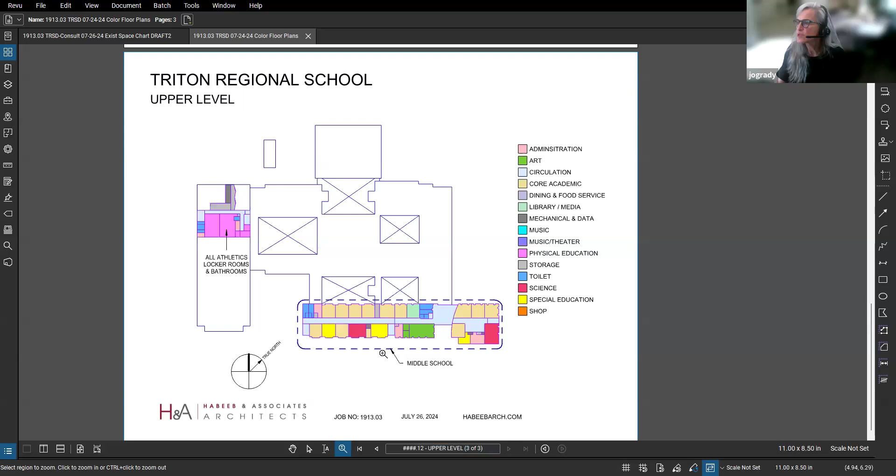There it is, okay, we are all seeing it now. So this is the colored floor plan, which is the upper level, and it's color coded for the uses. We have a ground floor, a main floor, and the upper level. It shows the middle school area dashed, and the shared area with a heavier dashed line, which would be the auditorium and the cafeteria. Correct? Yes, yep.

So a core academic space is typically a classroom, where instruction takes place. We have science classrooms, the media center which is the library, gymnasiums, cafeteria as mentioned, and art, music. We did see some rooms that were shop rooms—not sure we got that quite right, but I think there are some shops. There's the auditorium, and at the bottom we've identified the spaces being used for special education.

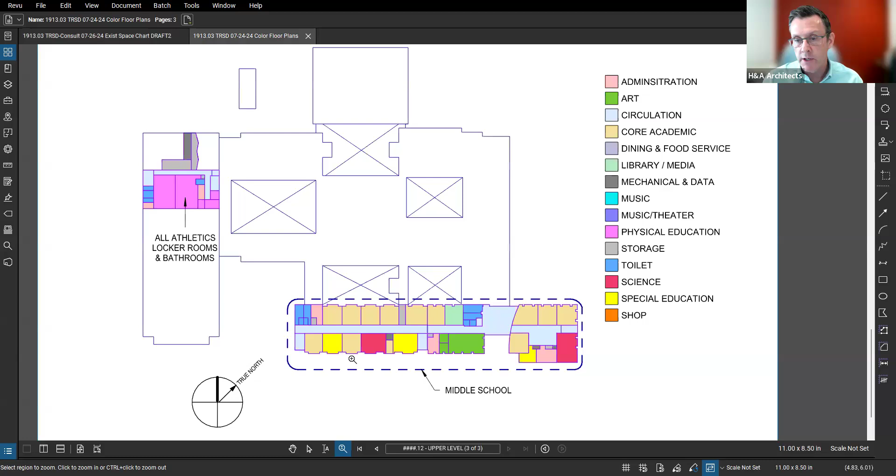But then over at the high school, the benchmark is 3,650 square feet, and we're over 10,000. We've heard comments before that the library has a lot of space and volume that's not being utilized—it's oversized for its use. It might be 3 times the size it needs to be. That's this area we designate as media center.

So this shows that the core academic spaces are undersized by the guidelines. However, they average about 750 square feet. Julia, I think is kind of what we— yes, round numbers, 750. So not that far off.

So I would not look at that red column and say we've got a problem. We don't see a problem, and the reason why is it's not that far off.

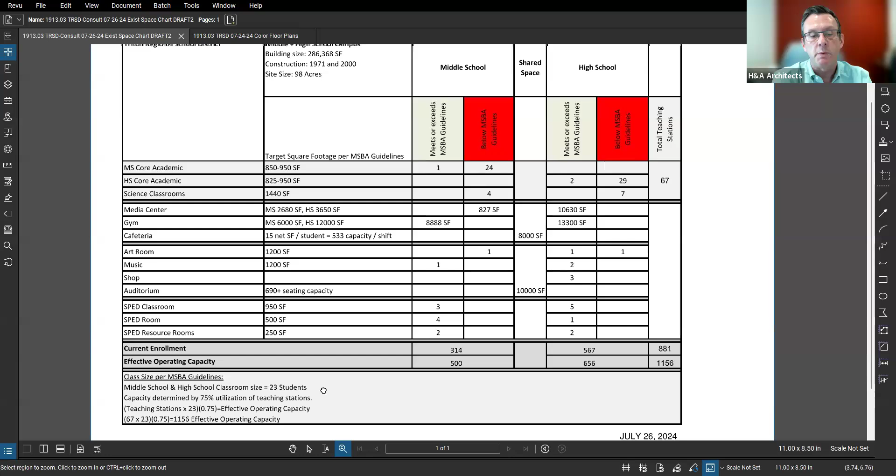If we go to the bottom of the chart, we compare the enrollments—314 students at the middle school, 567 at the high school. We're able to calculate the operating capacity of each school with some basic assumptions. We're assuming 23 students per classroom, but the utilization rate for teaching spaces is probably 75%, because students are moving from room to room each period, and there will be times when teaching spaces are not being utilized at all—there may be no teaching happening in that space at that given time.

So we can calculate the operating capacity of each school. The middle school capacity is 500, and the high school is 656. In total, both schools combined, it's 1,100 to 1,200 students as the potential capacity. So what this all means is that there's room to spare—we've got excess capacity, more room than we really need.

Even though we might find that some teaching spaces are undersized by the guidelines, I don't think that necessarily means there's a problem, and I don't think there is a problem. So I think the next steps—and Brian described it well—is what do we do with this information, and where do we go from here?

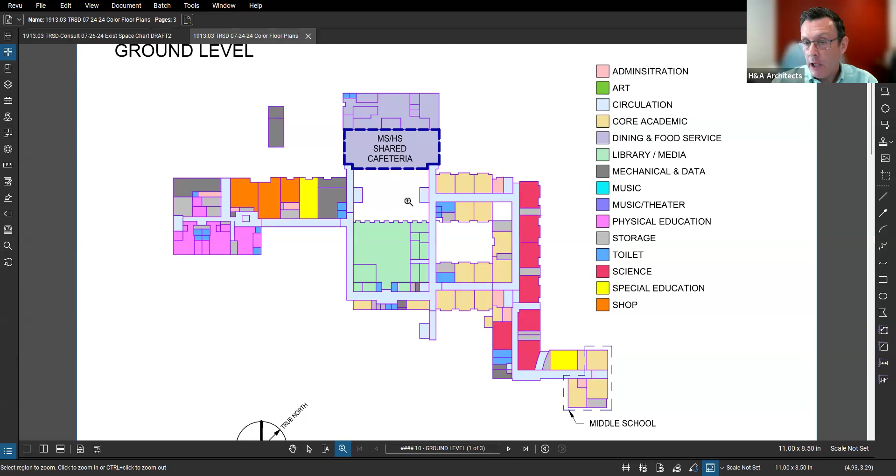So we did take a look at how the building is put together structurally, because if we're talking about potentially reconfiguring some spaces to create larger teaching spaces, we need a general sense of how much of that we can really do based on how the building is built. Our preliminary conclusion is that at least in the older part of the building, it's a reinforced concrete frame. The newer part is a steel frame. But the walls that separate the classrooms from each other do not appear to be structural walls, and they could potentially be removed.

Hey Kevin—yeah, sorry, before you go on, can I ask a couple questions about the chart? Because it seems like you're moving on in the report. I just wanted to, if we could. Yeah, I guess I have two questions.

One of them is this kind of caught my eye with the media center sizing, and then looking at the classrooms being underneath. I happen to know that the media center in the middle school actually used to be a classroom itself—it used to be that the middle school and high school shared the high school library, which is, I think, why it's oversized for what it is right now, in part, but it's also just a gigantic room for library books.

But then that made me wonder, when you said the average classroom size is roughly 750, and I'm looking at this 827 number, are we looking at some classrooms that are right under the limit and some that are way under the limit to get to that average 750? Are there some classrooms that are significantly undersized to get to that average?

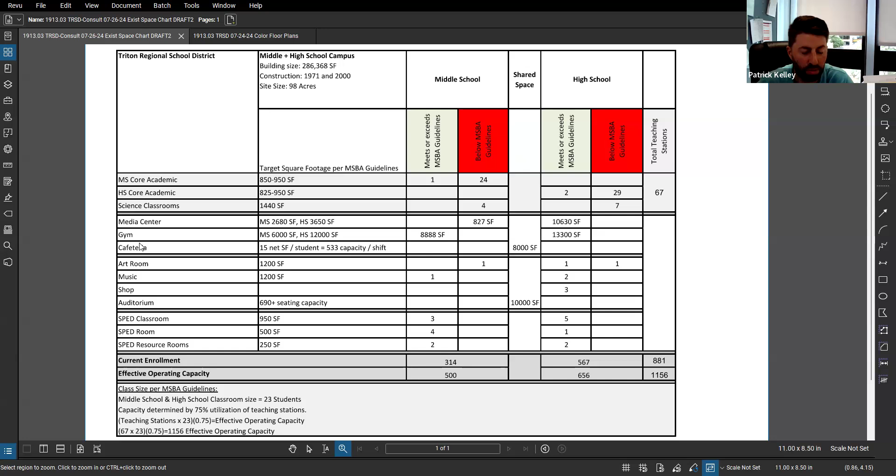It's pretty common practice across most of the state, especially when you're going through a building project, that people end up sharing spaces. But that hasn't been something that's been a reality here, just based on the size of the school and the way we use the building.

So the middle school and the high school are seeing the dip now, the bubble, if you will, that went through the elementary schools. The elementaries had small classes, it's not the COVID year yet, but that was already dipping down. So those bubbles are now moving up into the high school and middle school, so we have smaller enrollments.

And then on the other side, we currently have Newbury, the town that's growing. All of a sudden we have 65 students registered for kindergarten in Newbury, and it's been in the 30s to 40, 42 the past few years. So Newbury's now got the bubble the other way.

But I think when we get to the next step and say, okay, what are the needs, what do we all believe are our kind of pet project needs of things we want to make sure any plan has? For me, it's making sure it's scalable, looking to the future so we don't land where we are at Pine Grove, where we have awesome space per the design and the way we did that with the breakouts, but we moved down to 3 classrooms per grade level, and we can't grow back to 4 classes per grade level without spending money.

So it's making sure that when we move forward with whatever plans we're doing, we have those spaces so it may not be the ideal design, but it might be a classroom that's designed as something cool and fun and unique. But when push comes to shove, if we need an extra classroom, we've got a 795 square foot typical classroom that we can turn back into a classroom for no money. So that's getting the cart before the horse, but just to make sure that has to be something we're ready for. Alicia, I think that's a good point you raise.

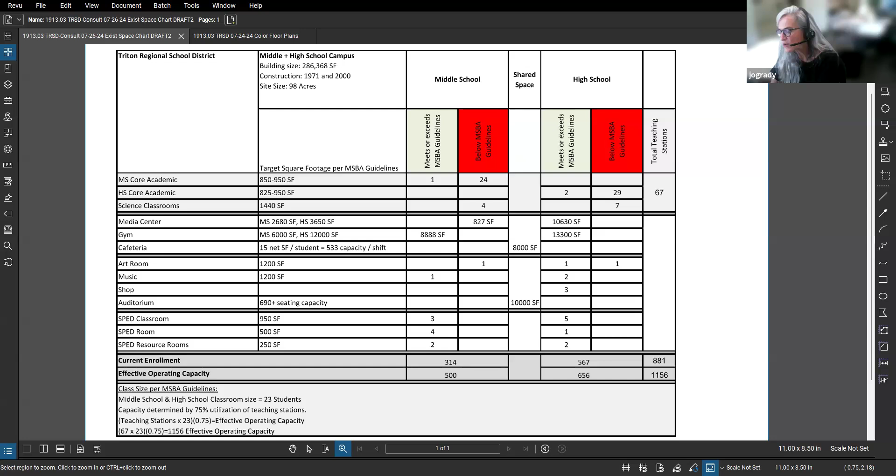Okay, and the core academic classrooms are 750. What about the science classrooms? It says the target square footage is... I think, Julia, they were around 1,000 square feet. And so their deficit is, in my mind, more than the core classrooms, because they're around 1,000 and we look to have about 1,400 square feet. So they're quite a bit smaller.

So I think looking to the future, we need to think about what are the 21st century teaching practices here that we want to see at Triton. And I think there's flexibility of use of space, but there could also be a need for having a larger teaching space so that students could break out into smaller groups, do group work, do individual work. We saw a lot of comments about that. So just things to think about as we take this to the next step, because I think we have some opportunities here to create some types of spaces that might not exist that would really be great teaching spaces.

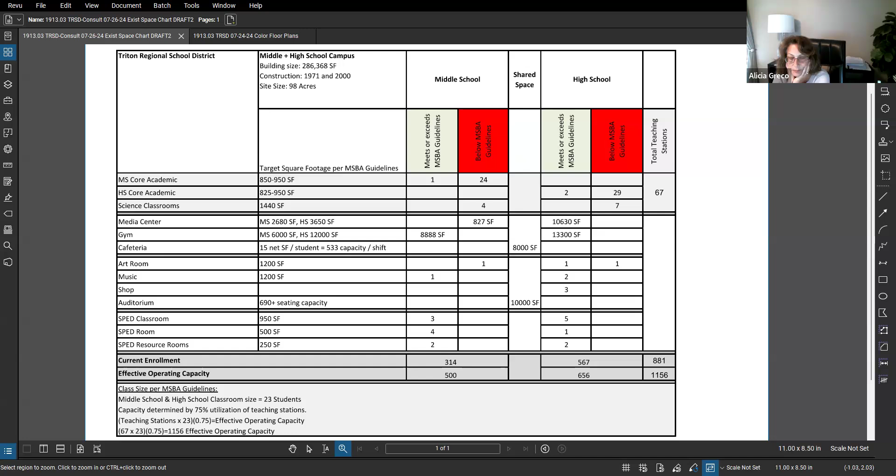All right, so where did we leave off? So you were sharing, I feel like you were sharing something. Was there another? The floor plans. No, yeah, I think we've gone through everything, Brian. Okay, so as far as, I should say, are there any other questions about it?

I'd reiterate, I think a classroom that's 725 square feet isn't worth spending a lot of time, dollars and time moving walls to get to 825 square feet. The next question is, what capacity do we have to move, add, or delete interior walls? And then, what are the most pressing issues? We've named two: science labs and scalability for the future. What guide rails do we want to give them to start coming up with potential alternatives they can play around with?

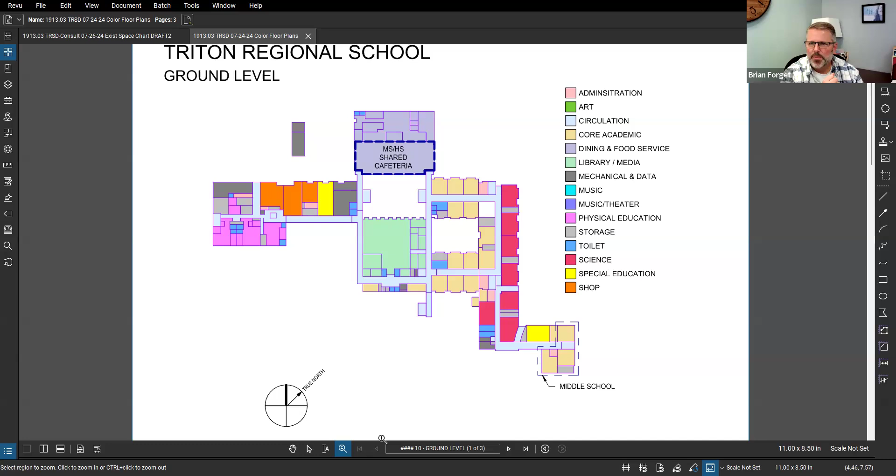So Kevin and Julia, we had talked about the fact that we do have the ability to move some interior walls. Can you talk to that a bit? Yeah, so what we're talking about is, in a typical classroom wing, we have what we call a double loaded corridor — simply a corridor with classrooms on two sides. I don't see any compelling reason to change that.

But the walls that separate the classrooms from each other, those could potentially be removed or relocated to make a space larger or smaller. So we can slide those around to create some new types of spaces, depending on what we decide the academic program should be.

Does that make sense? Yeah, so you were saying to me — and again, you didn't come in here to fully re-engineer things — but based on drawings and all the prints you have, you believe the majority of those cinder block walls between classrooms are not load bearing, which gives us the capacity to move them as needed. That's the impression, yeah. We haven't done a full structural analysis, but at a glance, that's what it looks like to me.

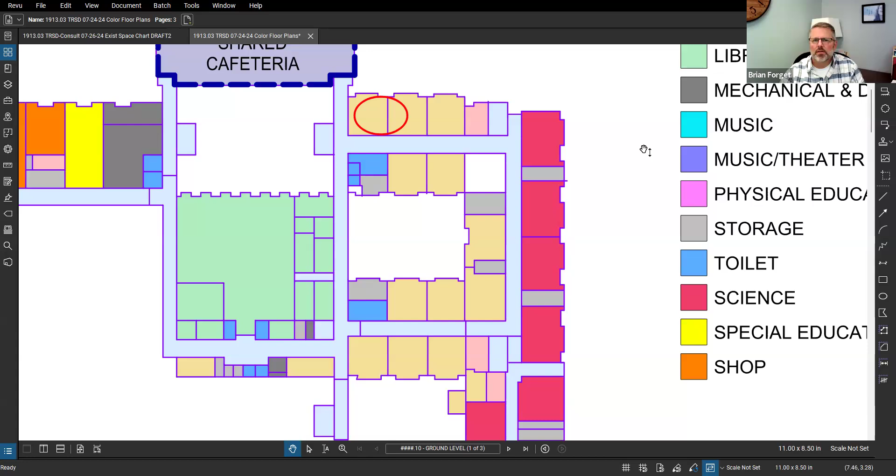Alicia, do you have a question? Are you talking about making these — let's just say for the sake of the conversation — you're going to remove that wall you have the ellipse around right now. You're going to remove that wall, you're going to combine those spaces. Is that going to be permanent, or is that going to be something you can move? Like I'm thinking of the old days when a conference room had those accordion dividers that went up and down.

So this isn't a proposal, this is to answer the question I had asked: are we able to move walls? The idea would be to resize spaces. So if we had where Julia was, you've got that circle — if we wanted to turn that current set of 3 classrooms into 2 larger science labs, making it up, they believe from their engineering study — again, not a full engineering analysis, but based on the drawings — that those 2 current interior walls separating it into 3 classrooms could be relocated into 1 to create that space. The idea would not be to go back to the 80s with open concept, with accordion walls, and let's all just learn in one big thousand-square-foot space.

My question is, is this something that's going to be a permanent solution or a changeable solution? It would be a permanent solution. What we're talking about is redesigning the spaces. And again, we haven't talked yet about what the priorities are. This was an exercise to say, do we have any capacity to rethink the space in the building as it stands now? If we get accepted into the MSBA, we have no choice, we have to study everything — that's part of the partnership with them. What we're saying is, as a plan B, if we're doing this on our own, do we even have the ability, or are we stuck with what we have?

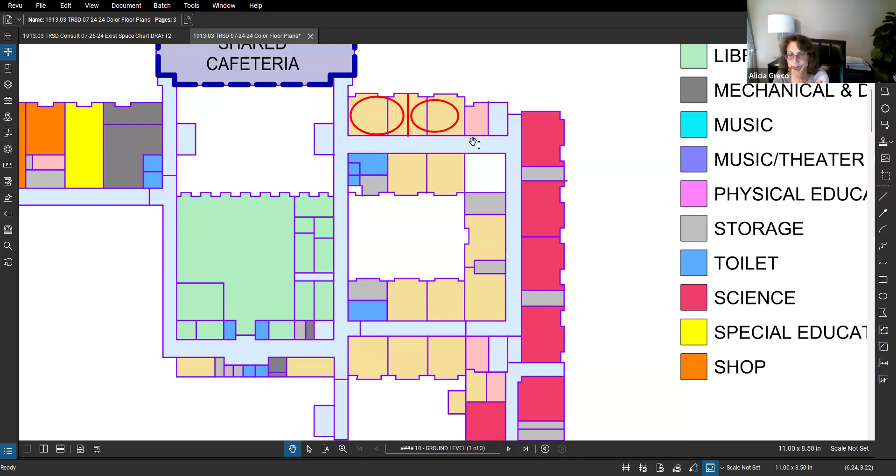Their analysis just said there's some flexibility. If we say we want 4 science labs, and we want them to be that 1,400 square foot space, that gives them the ability to say, oh, I can move walls and figure things out. But this would be rebuilding, redesigning the building as a permanent solution. Okay, that was my question — is this going to be permanent or temporary-permanent?

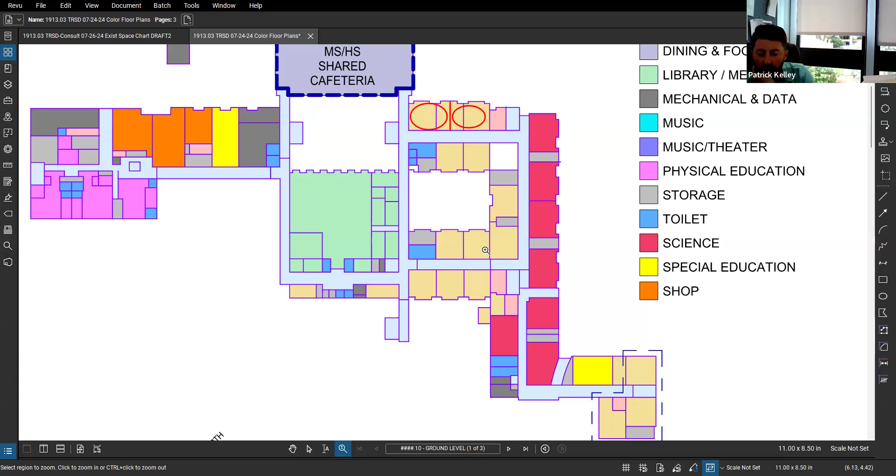Kevin, I had a question, thinking too about the walls where the lockers would be in the hallways. If we were to do away with lockers on either side of the hallways, would we be able to widen classrooms by 3 feet? That's a good question — probably, because the building structure appears to be a frame, meaning there are columns and beams, and the walls that go in between those columns are typically not structural, so they can be moved.

And that may also be the case in the corridor, so you could recover some space potentially from removing the lockers. Because I want to say I probably have 600 or 700 unused lockers each day. Yeah, that's what we hear over and over again.

Funny story. Pentucket rebuilt their whole place, no lockers - they put in day lockers. My son, who was a student at the time, was like, 'Oh my gosh, they're not giving us lockers, we can't do anything.' I said, 'How often do you use your locker?' He said, 'Well, I never use it.' So literally even the day lockers don't get used. So yeah, I would support getting rid of lockers.

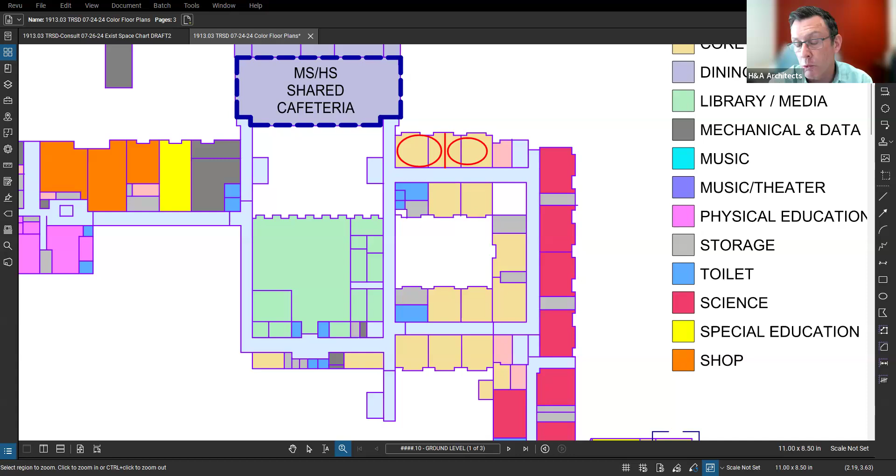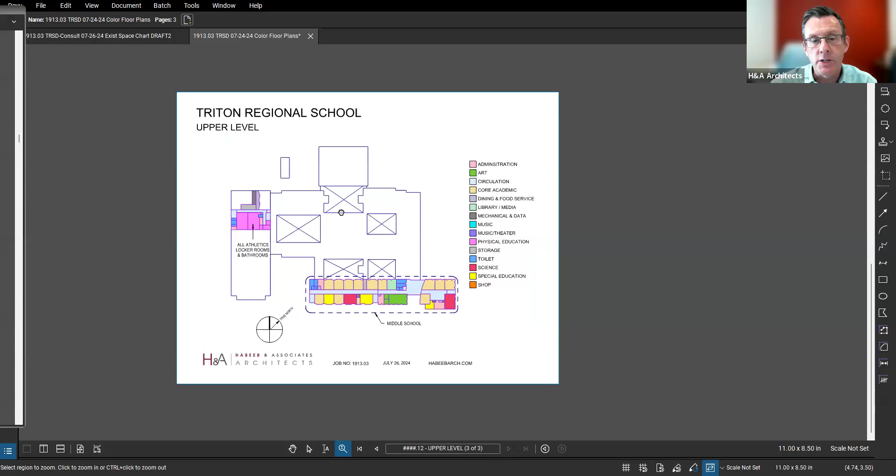And another thing to keep in mind is we'll be doing accessibility updates as we do this work - we're obligated to do that. In the older part of the building, the entries to the classrooms do not meet the accessibility requirements. They don't have the proper clearances around the doors. And I think we'd find things like that all over the building.

So if we're taking out lockers and making changes for accessibility, then those corridor walls are pretty much gone, right? That was your question, Patrick? Exactly - because I think we could probably recoup several feet on each side of a hallway, not make the hallway feel any narrower, and have wider classrooms. Yeah, I like it.

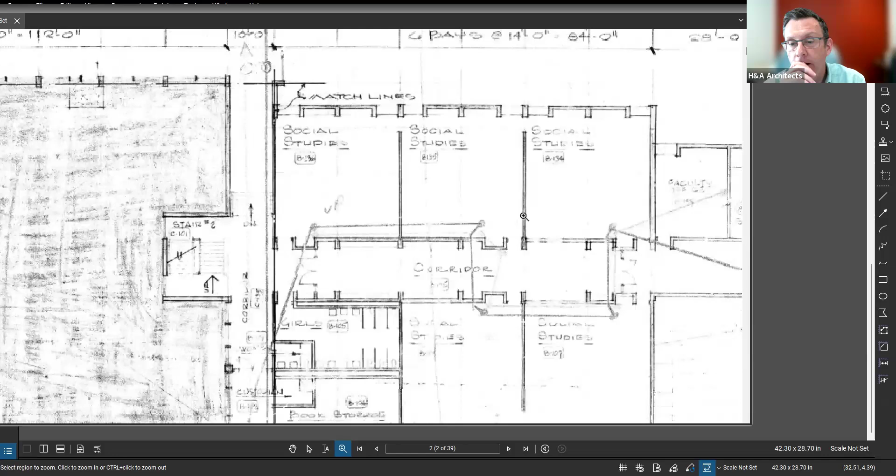So then, as we talk about what we would hope for down the road, the question would be what does that add for cost? Is that something in a new building you accomplish and it's affordable in a redesign, or is it unaffordable? So I think those are the discussions we get to have as we talk about what we can and can't do.

There's a cost associated with everything, and the walls that we remove to gain that area, they have to be rebuilt, so there's a cost for that. We also have to look at the structural implications that might bring about.

Well, I think what we'll find is that there's a row of columns in the corridor and a row of columns at the perimeter. You can kind of see where those bumps are - those are likely the columns right there, so those are likely the structures that would be structural.

So that could end up limiting things - they line up with all those bubbles you see at the top with the numbers 30, 31, 32. So those could not be moved. So to your point, Patrick, a lot of those lockers are filling in the spaces between those bump outs. So if we couldn't move those beams, or posts - whichever they are, they're posts, columns - then that would kind of nullify that.

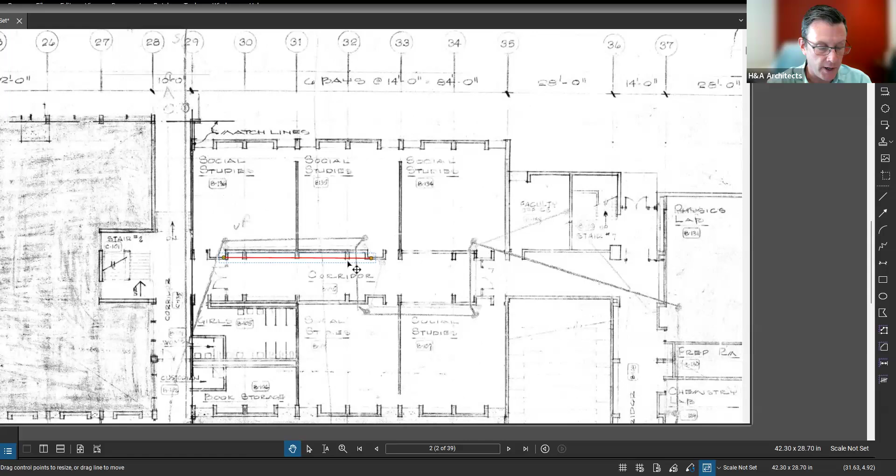But I feel like we're jumping into the exciting stuff, like what can you do - you're getting a little bit ahead. I think we answered the question: this building has possibility. This isn't a building where we're saying you're stuck with it, everything's concrete, you can't move walls, let's just do fit and finish. So if we're saying that, then I think the question for this group is - this is the exciting part where we finally get to talk about, okay, what are we looking for? What do we want to do?

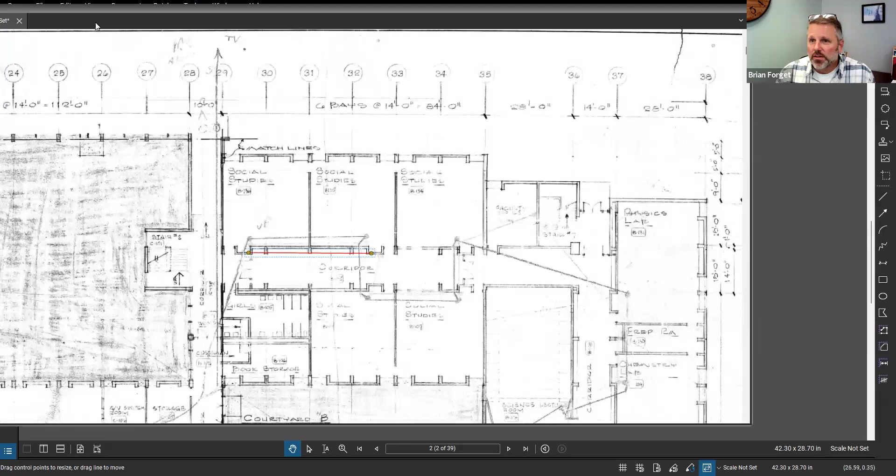I think it's a safe assumption that every bit of mechanical, electrical, water service, everything - building envelope, soup to nuts - that has to be part of any renovation. We need an entirely new building on it, essentially. We want the kind of Pine Grove treatment, where we start with assuming all of the infrastructure is brand new and the building envelope all redone.

Aside from that, what are - and this is, we're still thinking high level. If we were getting into actual designing, this would be a much longer and more involved process. But for this exercise, to give Kevin and Julia a charge to say, as we're thinking about potential options, what are the boxes aside from knowing we need to update all of the mechanics and the building envelope? What are the other things that we want to accomplish?

And I think this is a chance for us to share that with them, to give them some guidance on where to start peeling back the onion and seeing what we can do. Does that work, Kevin? Or is there a specific format, or is it just ideas at this point that's helpful?

I think we need to hear what those ideas are, right? What are the types of spaces that are lacking that we think we're going to need? If we want to update our teaching practices, do we need different types of spaces, larger spaces? Labs we talked about—does the art room need more room?

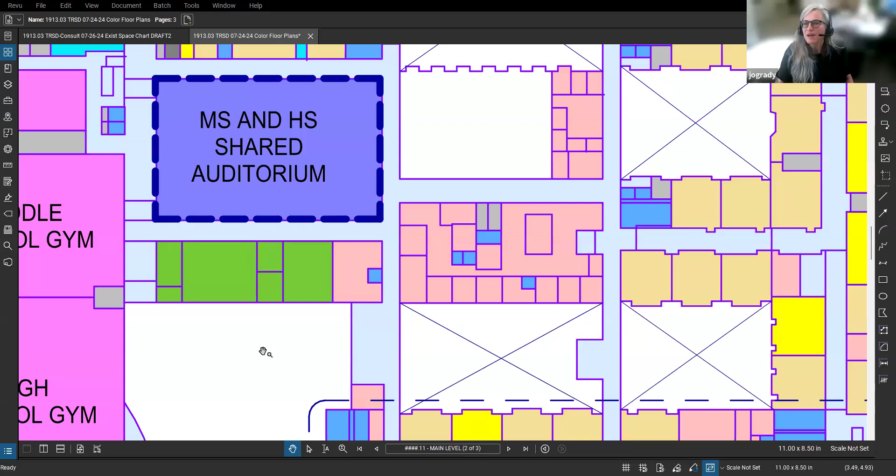Patrick, is this the small art room? Is this the nurse's office you carved into it? You're not sharing your screen anymore. Oh, I'm sorry, want me to share it? Maria, is it letting you? Yeah, there you go. Okay, so is this it? That's the small art room, yes. Okay, that makes sense from what you said. Why is that art room so tiny?

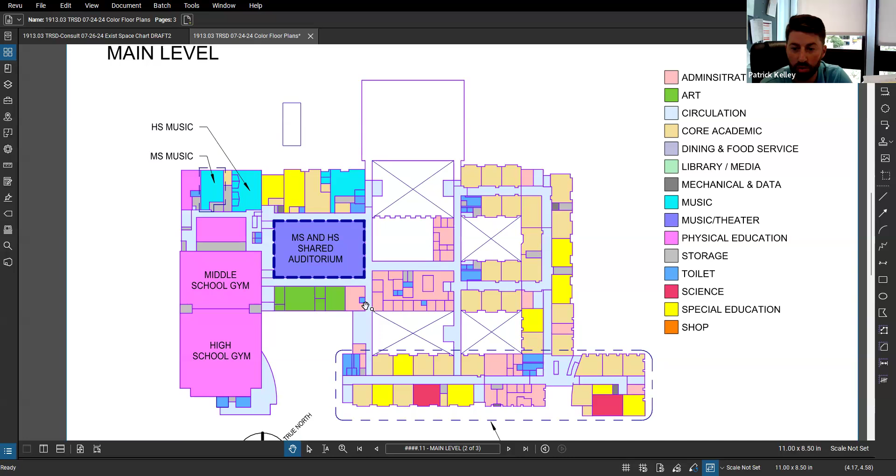You can see it's probably two-thirds the size of the other room. And then based on unique programming and the needs of our teaching staff and their talents, one of our art teachers is also running a metalsmithing studio downstairs out of our shop. We've got a section of our shop downstairs that's unique, something we'd want to keep access to and would probably want to design differently if we were building it out. We might want our art rooms in that area so it's easier for us to function.

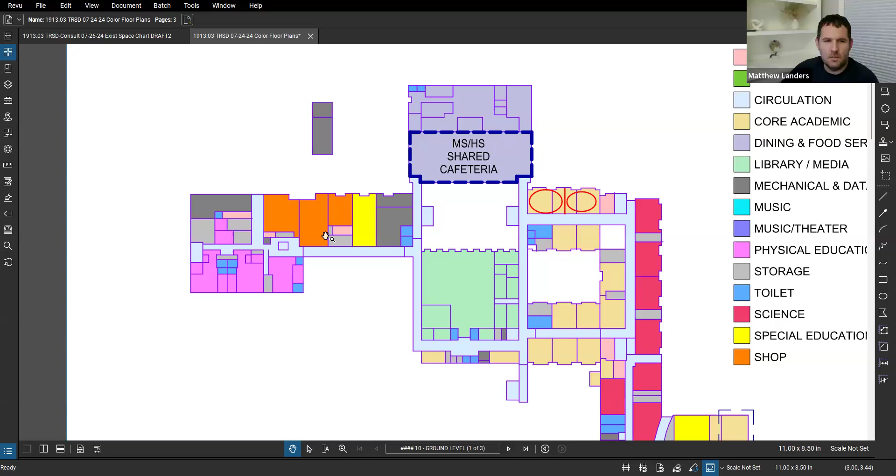Is the wood shop used? Yes. That's a huge area where we have our wood shop, our tech lab, and all three of those orange spaces. The one furthest to the right is where our metalsmithing studio is, the middle is the wood shop, and the one on the left is the lab where we've got computers, 3D printers, and they're doing more engineering design and engineering tech.

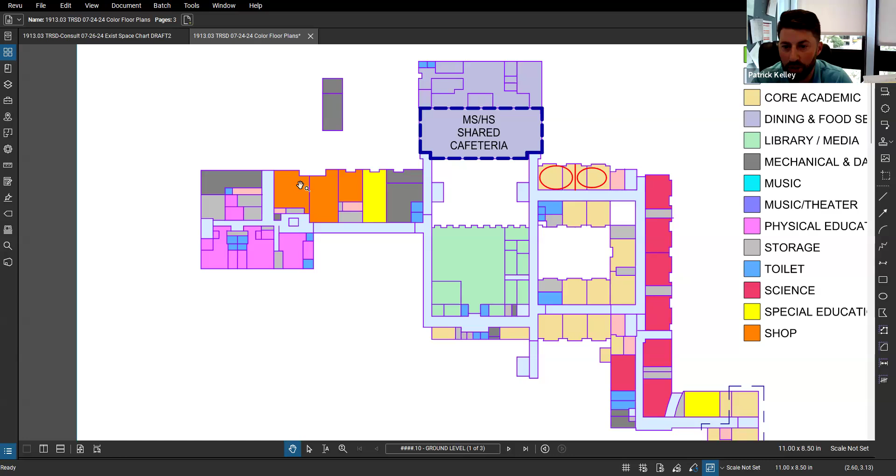So that's a lot of space for the number of students that are going through there too. Yeah, gone are the days where all that equipment is massive and huge, so I think there's a lot of space to capture there.

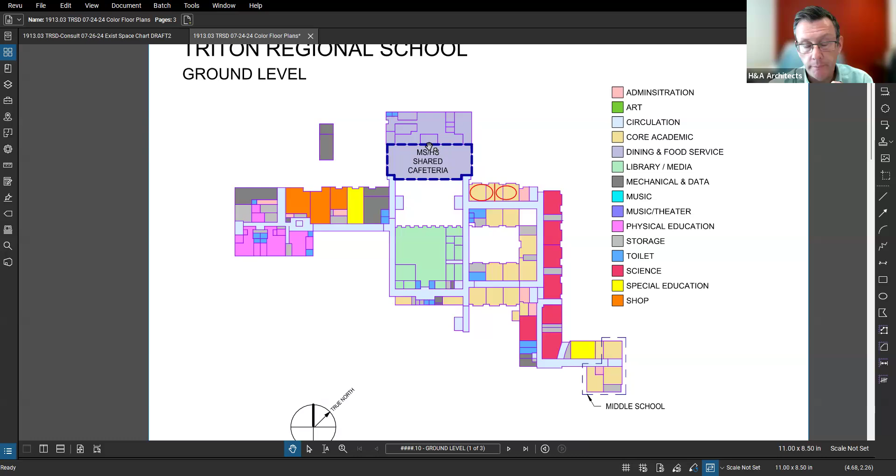With the two art rooms, if we were to write off that hole where it says the shared cafeteria space—back to that thing I keep talking about—I imagine it's probably really expensive to relocate a kitchen, since if it's a new kitchen it's new equipment, it's the plumbing. But I feel like that whole back cafeteria could just be removed. It's an area that could be razed if we could figure out how to put that as part of a dining commons, as part of an entry up next to the gym and the two gyms and the auditorium.

Because what would you use that space for? Just parking? Yeah, I don't think there's ever a bad thing to say there's more parking spaces or more field space, or rethinking it however it needs to be.

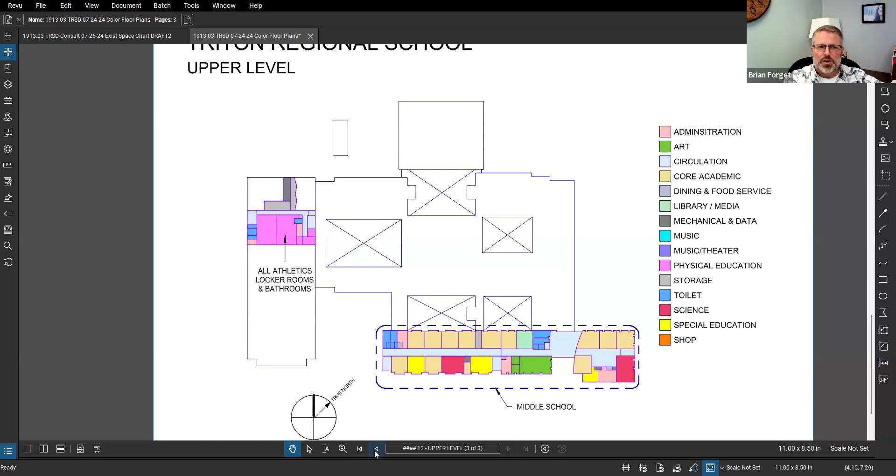If that were to the right of the high school gym and middle school gym with the auditorium, if you were to take what is the art wing in pink and green, you've captured a whole huge space that then puts the only missing piece as the library, because when we talk about what gets rented, that becomes the public third of the building. But the gyms, the auditorium, and then putting food services and all of that in the same location and having that be the entry is an incredible efficiency of use.

From a security standpoint, it allows us to sequester off that section of the building. Because yes, we do have people using classrooms, but 90% of the rentals, as I said, are in those spaces.

So I have a question—what are the big white spaces? Those are stuff on other levels, or exterior courtyards. I think on this sheet, Julia, where you're pointing, that's the upper part of the library, if I'm not mistaken, right? No, it's a courtyard. That's a courtyard? Yes. Where's the library then? That's the one, yeah. Ah, okay, got it.

The library is below here. Do the courtyard spaces get used? Is that where the Ark used to be? So those are truly outdoor courtyards, like literally outdoors. Do they use them? Some of them. We have two that get used frequently and two that do not.

I think if those were designed as a design element, if they were more accessible and had stairs where the concrete wasn't completely shredded, and had doors that opened without needing duct tape to keep the rain out, those could be incredible academic spaces. Absolutely, for outdoor teaching purposes.

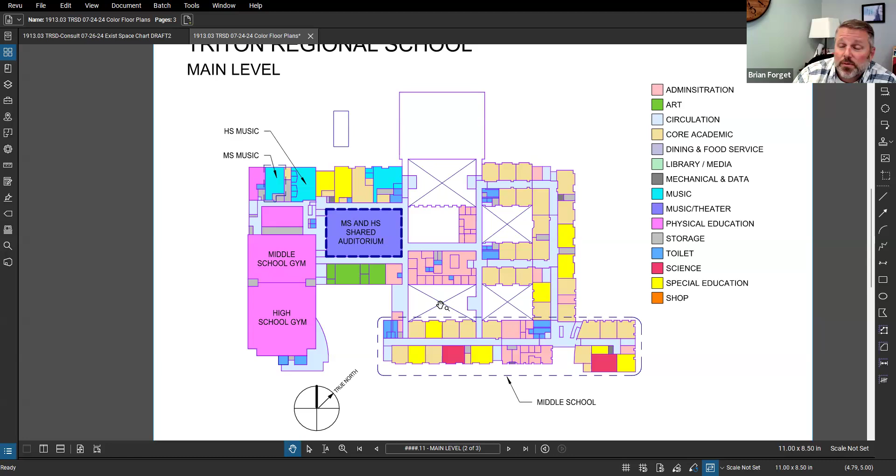So it would be re-landscaped, and in the process we could think how to make those educational spaces. It's not ever bad to have interior-adjacent spaces where kids can hang out without getting out entirely. Some of that was in the MLP report - some teachers and students requested more outdoor space. Yes, I recall that.

I love that as an idea, as a concept. So all 4 of those X's are courtyards, right? Yeah, there's one outside the cafeteria, and then that one, and then the one to the lower right - that's where, the one up a little to the right of the library, that's where the Ark was, where Dave Taylor's animals lived.

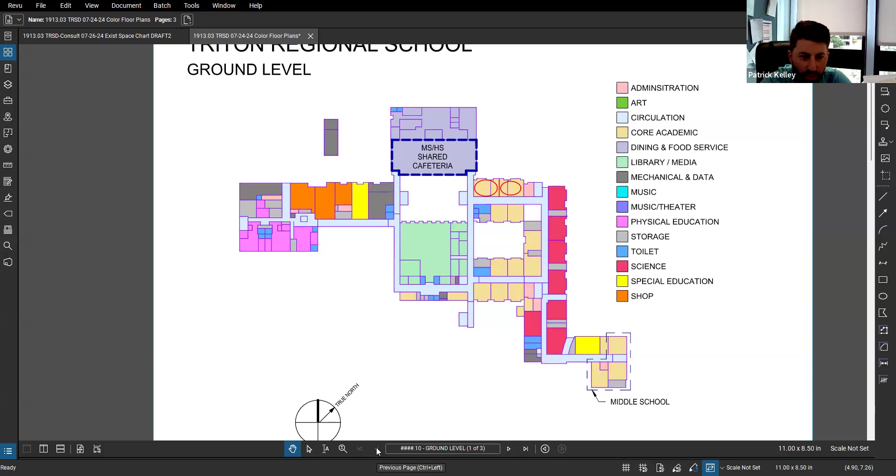So I'd say the one in the bottom right is the one we have the most capacity to change functionality for. There's a greenhouse attached to one side of it on the lower level, but that whole area would make for a really nice lab, like extended lab space for science classes. That's about how we were thinking.

When we think about how we're using spaces, I definitely see the need for larger common spaces, spaces that encourage discussion and debate, and spaces that have greater access or functionality for multimedia type spaces.

We've got our TV production studio that's outside, that I would love to bring inside and make more of a focal point of our campus, given how many students participate in that programming and how well done it is. It would be great to bring inside and have a true studio built out, so kids get access to higher level multimedia production.

Trying to think about what our tech ed spaces look like, wanting that to not just be a traditional wood shop. Based on who we have on staff, I think we're more likely to be moving towards engineering than wood shop, so wanting that to be more of a design studio.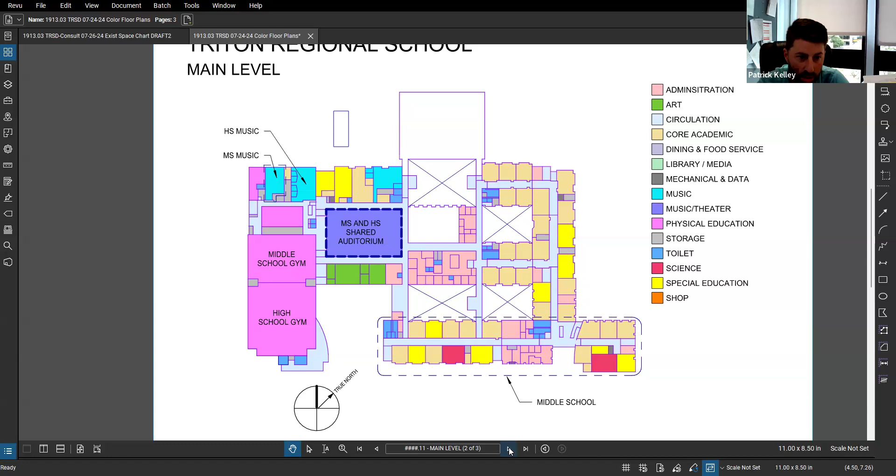Based on some of the staffing reductions, we have a couple of spaces now that we're using as shared or common spaces for departments for the coming year. I think having that flexibility is really essential, but the lack of square footage and the type of furniture in each room kind of limits some of what staff think about or do.

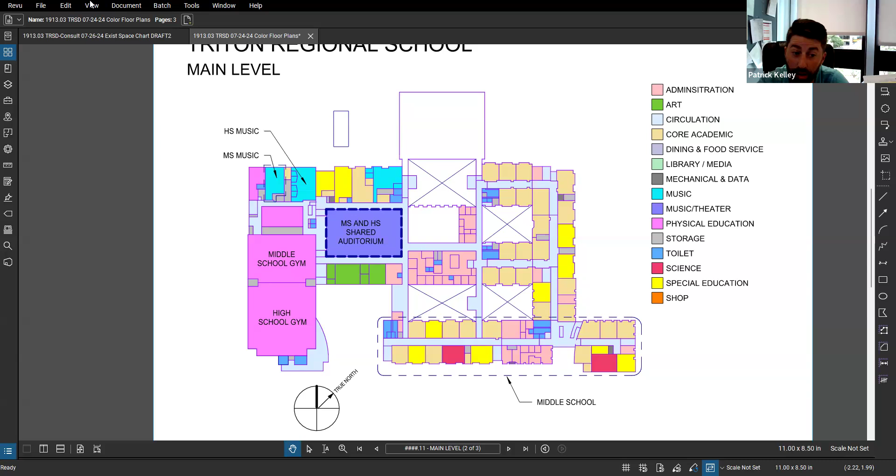And what about the music program? So our music program right now, I think we almost have more space than kids. Unfortunately, the room labeled there as high school music is not in great shape - that's one of the places where the roof is in the worst shape. But we've got that, and then the space to the right that's in the teal color - that's our choral room.

We've got those 3 spaces for 2 teachers, and they're 3 of the larger spaces in the building. They could be designed differently and function slightly differently - there are certainly things beneficial to setting up a music space for practicing choral versus practicing for a band. But I also envision a world in which we're operating our music program 7 through 12, and we have one of the 2 spaces set up for band and one of the 2 spaces set up for chorus. Then the 3rd space becomes something else.

Away from music - yeah, it could be an expansion of our theater program, that could be where we put our TV studio. It'll likely be something else in the arts. I'm not sure in a school of combined campus of under 1,000 students, where our numbers are, that we need 3 of our largest spaces to be music, as opposed to having it be 2 of the spaces.

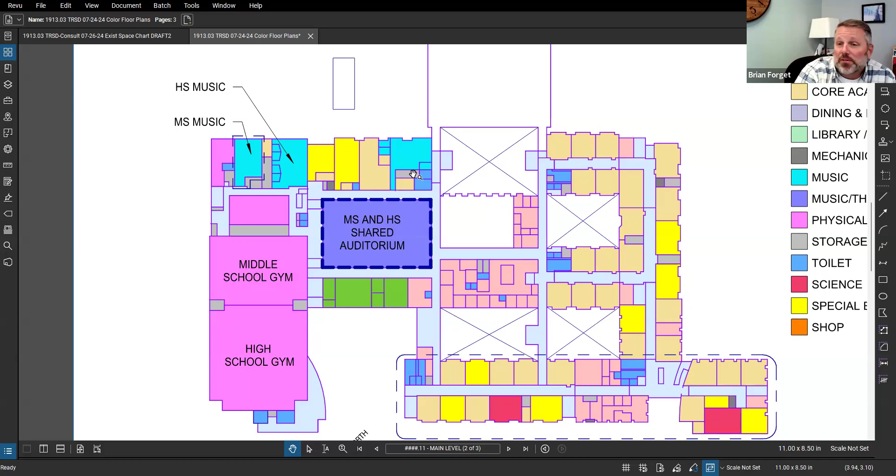The current auditorium has the ability to roll out and close off the back half, and I would love to be able to shrink it in half, because an elementary performance may not be huge. So how could you maintain it as an 850 seat auditorium, but also make it feel a little more cozy for an elementary level performance where we'd expect 400 people?

I would love to think about that as a space that all of our schools would see as a resource. We keep talking about ways to get all of our students onto this campus, so if there's a way to use the theater and auditorium toward that, I imagine we could be really creative with that space to make it attractive to a lot of different people, not just the middle school and high school students or programs.

The way I could see doing that, since I've thought about it a bit, is with the art classrooms we've got - if those were moved somewhere else, you could have some type of garage style door there that goes up, and maybe that's where some of our shop classes end up.

You referenced Pentucket - I like that they have their shop classes on the backside of their auditorium, so they keep all of the tools in one space, and what they're building goes directly to its location.

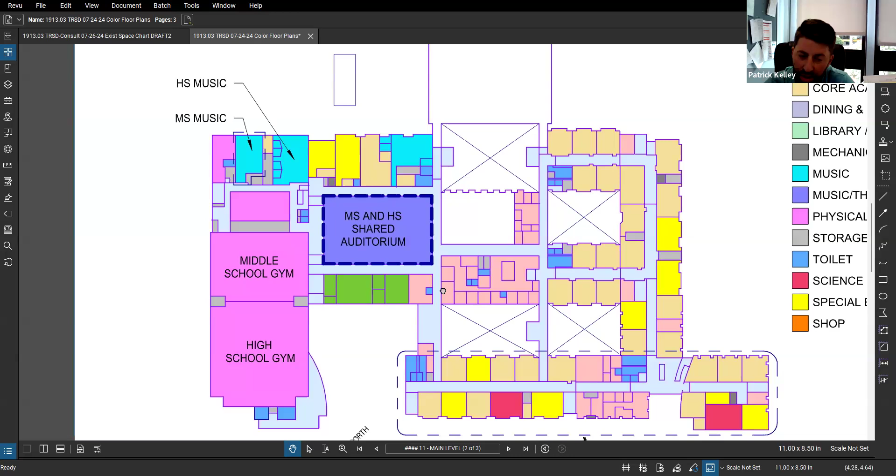Or the corner of the middle school by the entrance - if that area you're talking about moving the cafeteria to, Brian, if the cafeteria does go into that location, the corner right at the front of the building that's tan, all the way towards the left over there.

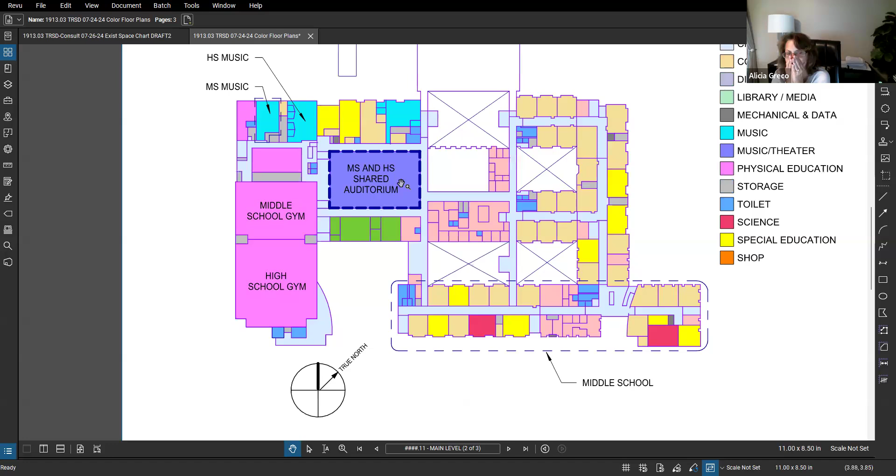If you were to put a hatch door there - not necessarily what I want visually right in the front, but it's on the right level to take something directly down the hall into the auditorium. I hadn't thought about it coming from that side, especially if that was open.

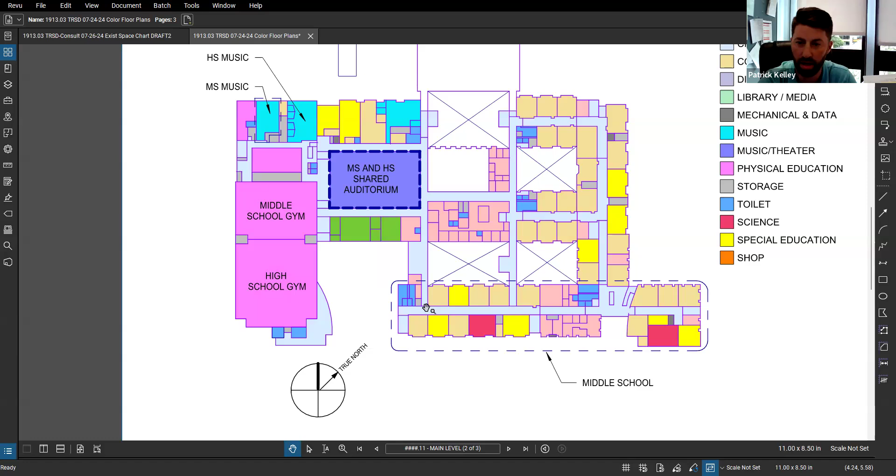I was thinking, if we're reconfiguring the front of the building, that would be a great way to have the entrance - if we're doing a true singular entrance to the building through the middle school entrance as the primary way in, with the primary office suite and all that stuff. Then having that look a little different with a garage style or hatch style door gives you the ability to run straight down that hallway.

You could also, if we're getting rid of the cafeteria and possibly shrinking the library, come in that way. You're just dealing with stairs there, Matt - having to go upstairs or needing an elevator that brings you up.

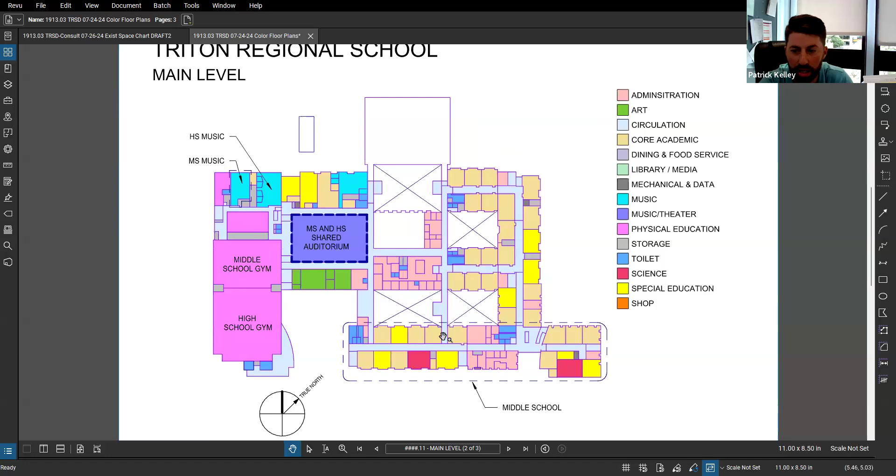What they look for in a lot of auditoriums is to be able to roll something direct into the backside of the stage, at the stage level. But we're also going to need to get deliveries to the kitchen as well - that's daily, so you definitely need to be able to have deliveries to a kitchen.

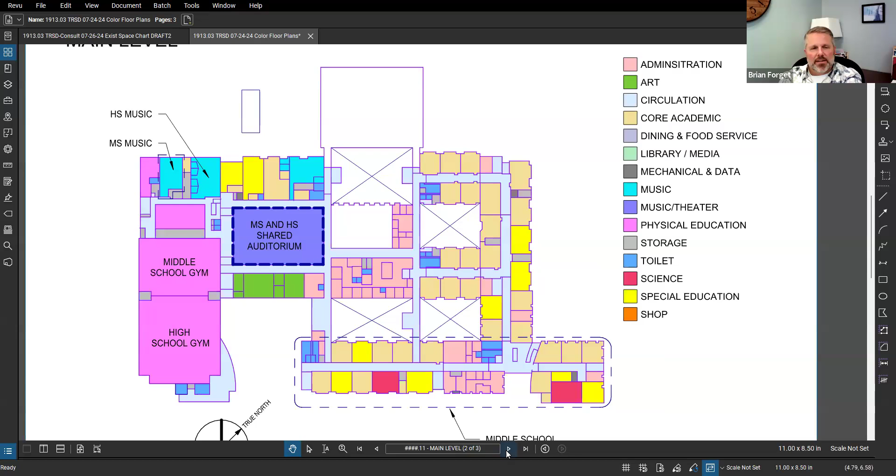A lot of good ideas. One of the things I think a lot about is that our school, with all these cinder blocks, feels like a bunker. One of the things that came out strongly from both the kids and the adults is wanting the space to be brighter, wanting it to highlight more of the natural beauty we've got in the area.

Being able to make learning visible - I think that's one of the hardest things about our campus right now. It's very difficult to make learning visible and have kids excited about the learning they might see just walking down the hallway in someone else's classroom, because most of our rooms have only a 4-inch by 1-foot sliver of a window to look into the room through. That transparency...

I think that could be really exciting, especially for a classroom on the edge of a courtyard, where you can really just kind of see right through to the outdoors.

Can I ask a question?

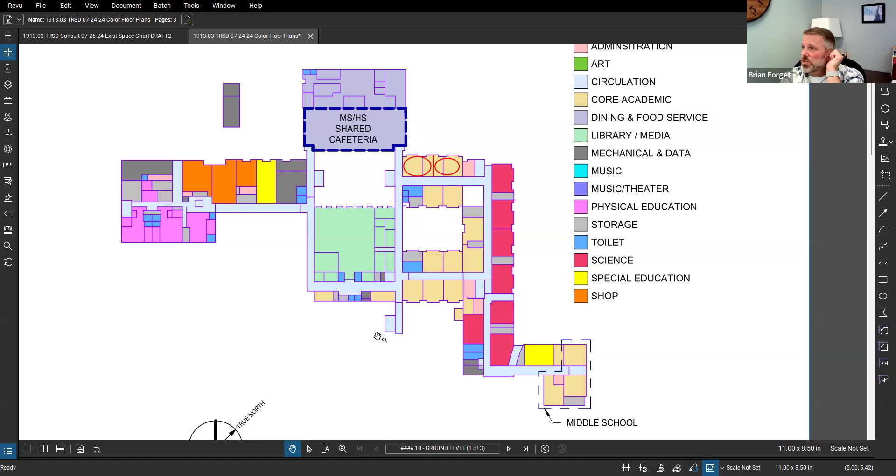So the middle school came online roughly late 90s, 2000. So all of those windows and doors were new then. The rest of the building, the windows I'm looking out at, I know the frames date back to 1967. The glazing was updated in the late 90s.

Is there an argument that if we're redoing this building, we're replacing everything, even the 25-year-old stuff, so we're starting back from that MSBA mentality of wanting this to be a 50-year solution? If we had to reverse engineer it and say okay, we're going to leave the windows in the middle school...

I'd love to hear what other people think. I know that adds significant cost, but at the end of the day, the hope would be that we have a building we're saying is the 50-year solution, and build our capital planning and needs from the same starting point, rather than saying that section of the building's windows are a little newer, versus having a building that's entirely, again we keep going back to Pine Grove, where everything, even different vintages, was replaced, so you're starting from ground zero again with future planning.

Yep. I think any project needs to include full envelope replacement and updating.

I agree. There's also energy costs and operational costs to consider as well. If we have the opportunity to upgrade the envelope and make it tighter and increase the insulation values...

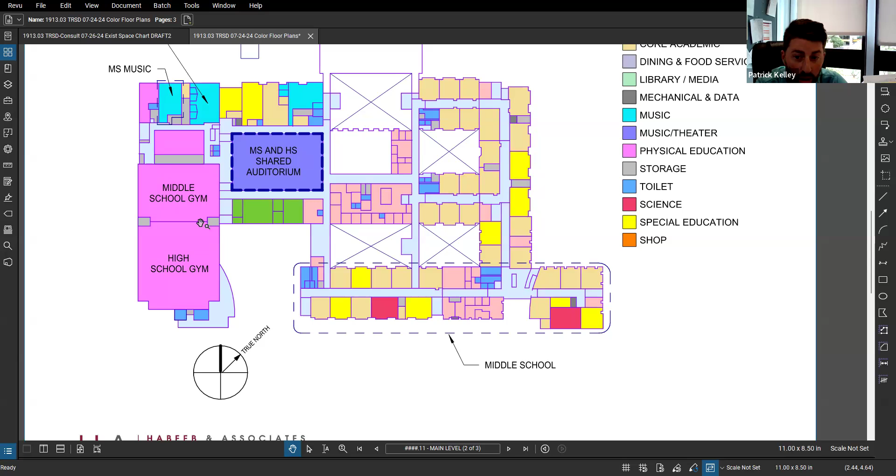We could theoretically have the square footage for what would feel like a pretty big field house, a fancier term for gym, but we might be able to run indoor track and field events out of our facility, because we likely would have the square footage to do so. With different flooring, that becomes all of a sudden a selling point that people are looking to rent out space for. It highlights one of our strongest athletic programs, and gives us a little bit of a different functionality for that space.

And I'm thinking even Triton Youth Basketball benefits from having the two separate spaces. I hadn't even thought about that. If you look at that pink on the screen, that's a lot of real estate. And if that were to be one space—I'm not sure if those two gray columns are structural—but they're two separate vintages, that's the issue, right?

The high school was original. If there was a way to create one space with kind of netting hanging down, so you had two full-size basketball courts side by side and then had all the others, that would, with the track around it, be incredible. Yeah, I think that would be an amazing use of the space.

I think the alternative to that is if it came down to figuring out space, and cost-wise it was more efficient to only have one gym—again I think the gym functions well as the high school gym—could we capture some space for some other athletics-type spaces? Not athletics classrooms, but workout rooms or other places where other physical education classes could happen that wouldn't have to happen in the gym, and still capture some space.

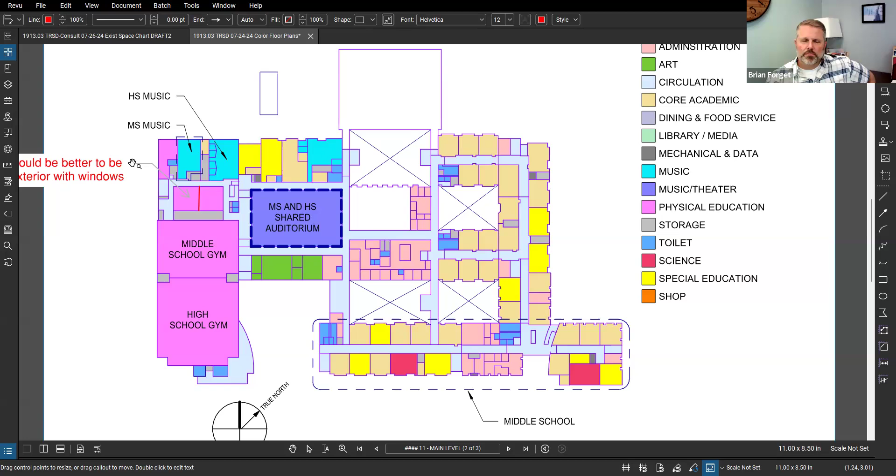Those are the most humid rooms in the building, and also have the highest likelihood of germ transmission when kids are fully sweating in those spaces. Probably under-ventilated as well. So if we could have those spaces go towards some exterior point, that makes total sense.

What's that other pink space? Next to the locker room. Music? Okay, top left corner there. Yeah.

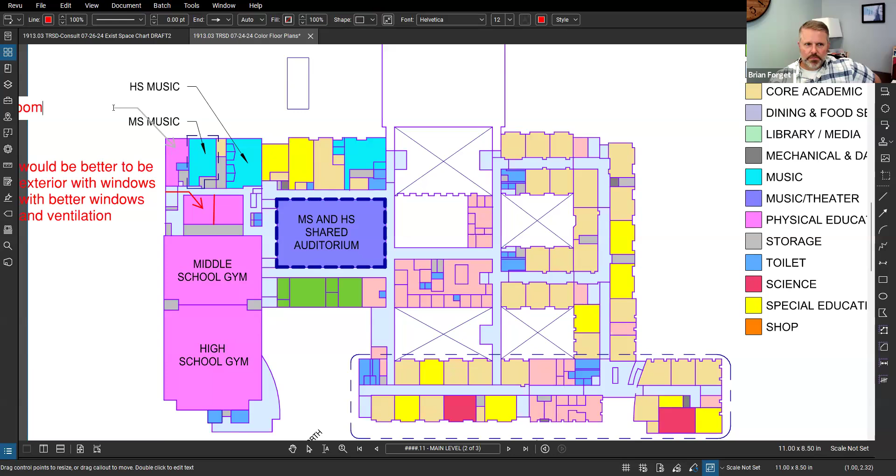Would you need - do they use those lockers in the locker rooms? We use all of our locker rooms in varying amounts. That's our nicest locker room, and the kids do use them, unlike their school lockers, because they're changing for sports, or for gym class, but predominantly it's changing for sports.

And they're male and female? Yes. Are there showers in there too, a full setup? Yes, the showers desperately need to be updated in some of them.

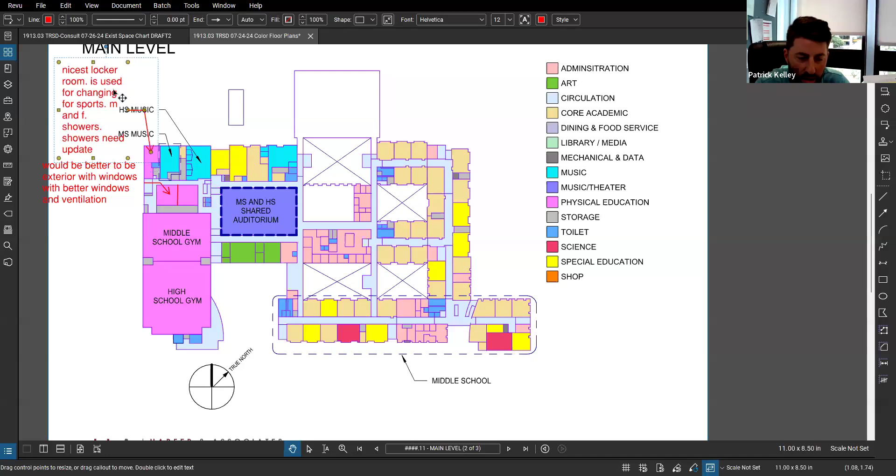And there's 2 locker rooms below that as well. I think we went on the tour, right? Yep, there are locker rooms below and locker rooms above - those were the ones we went down into, the dungeon. Yep.

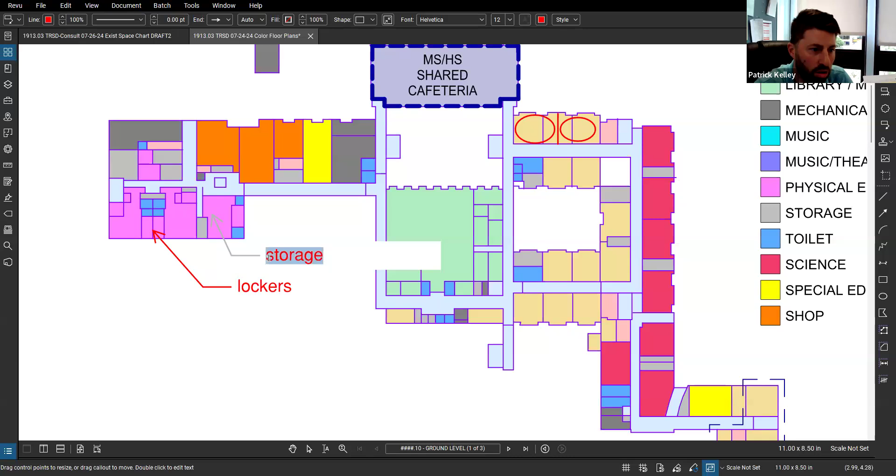So that whole area down below is lockers, except on the other side of that hallway, that's storage. We have the training room, that's the pink, and the gray around it is storage. Is this a training room then? No, not that one - on the other side of the other hallway. Okay, above the locker room, right?

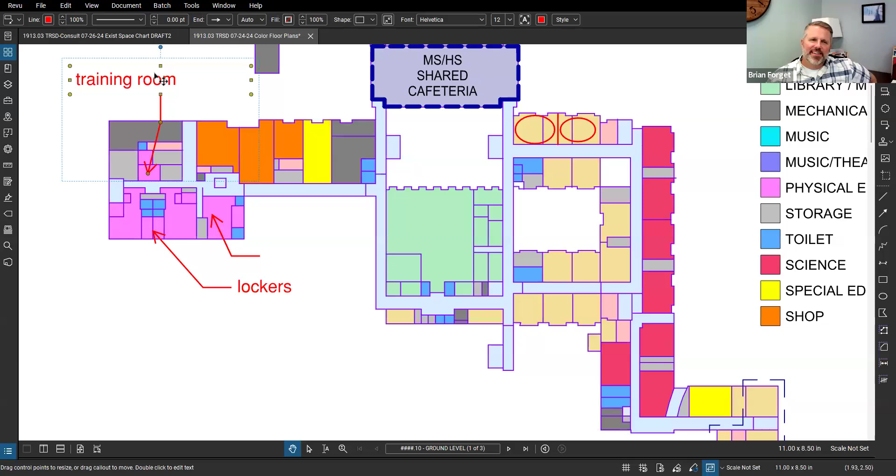You're saying, yeah, above the locker room - thank you for the correction. Training, yeah. And you have 2 of them? It's one room, slightly split, but it's athletic training, and it's not a very big room. That is not a very big space.

Part of it has the tables the trainer's working on, and the backside is where a student doing stretching or strength building with the trainer works. So it's got a little equipment in the back, an ice machine, and then the tables in front. So does that need to be bigger?

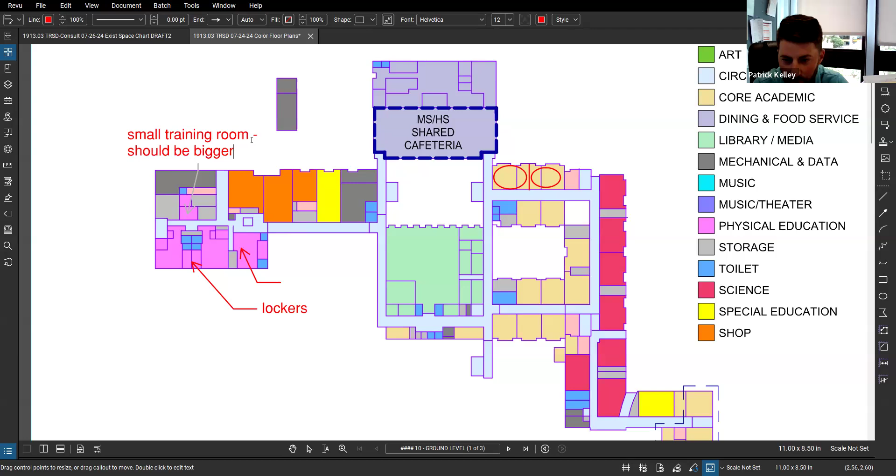I would say 100% it needs to be bigger, and it would also probably be better if it was located closer to where kids are playing, whether closer to the fields or closer to the basketball court. I don't know your thoughts on that, John, but maybe closer proximity to the basketball court makes more sense. Yeah, I think so.

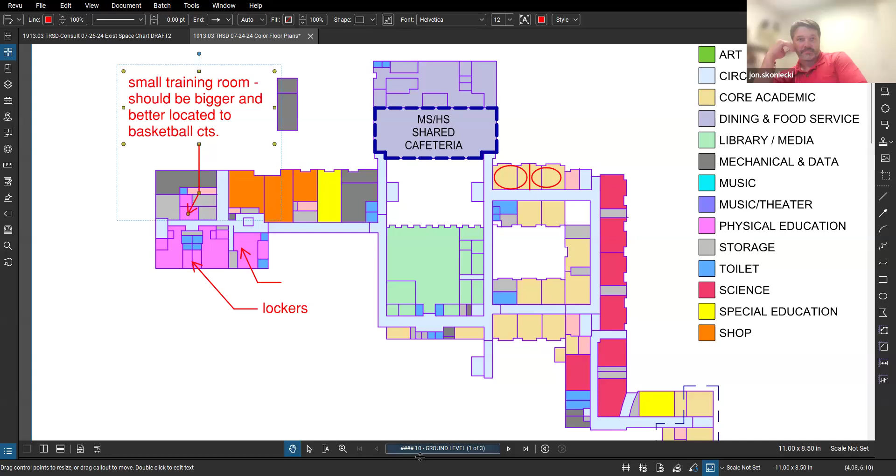And you have 3 locker rooms there? Yes, and then 1 more upstairs, so really 4 locker rooms? It's actually 5 - upstairs and downstairs, because the kids separate out by team, but likely we don't need all of them if we're redoing spaces, you know what I mean?

Because teams can share in season. The one that's in the roughest shape is the one furthest to the right, and that's the one that football, wrestling, and lacrosse always want for whatever reason.

I always look at this corner of the building and feel like, aside from the cafeteria and moving it up front, this is the corner that just gets chopped off, right? And we start from scratch with the number of locker rooms, and we saw the drains and the amount of work that it would take.

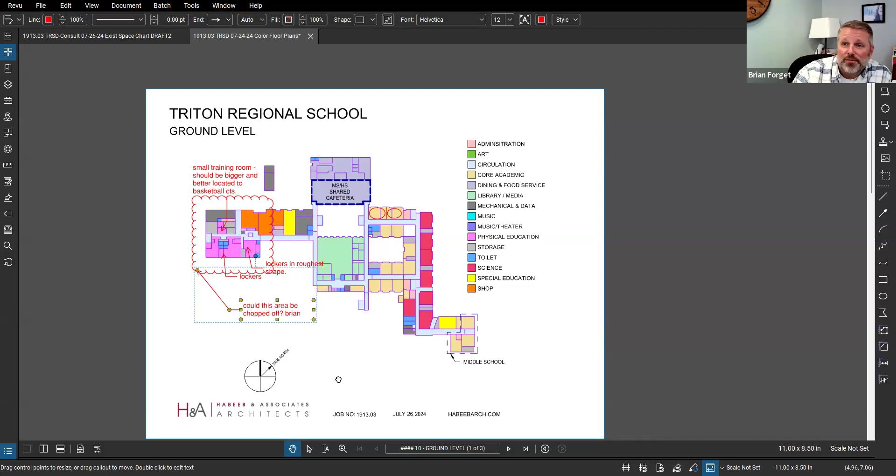Like when you go back to, and I know it's 2 stories, I think there's some space we don't need - 6 or 7 locker rooms across all these floors that we could be more efficient with, or those shop spaces. When we look at the library, not only is the footprint huge when we talk about square footage, but it's also 2 stories. So if we made the library half the size it is now and made it the upper story, put a floor in, you'd have the entire first floor that could become all kinds of things.

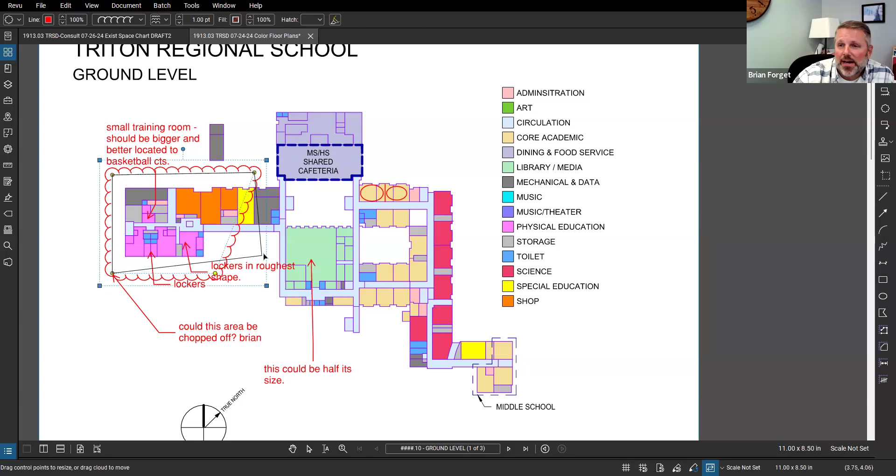And if that wing then disappeared - that corner, everything from that hallway up and over, even just to the right of the bubble, I love your little design tools with the bubbles and the columns - all the way over to the gray, if all of that could disappear, then you'd have access to the backside of the auditorium too. Again, that's 2 stories, that's not easily done, but I feel like there's a lot of space in there that's either not needed like locker rooms, or oversized like all the shop spaces.

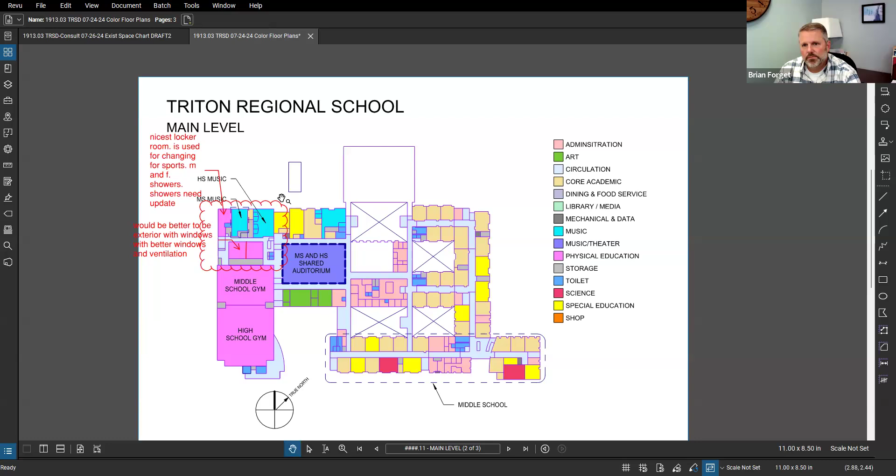I think there's a ton to capture in the library. That back end where all those locker rooms are is actually 3 stories, right? Yes, it is. Because you've got locker rooms up top, you've got the athletic director's office, there's the girls' locker room up there, and then the mezzanine above the band room. That's right, yeah, and again, a lot of unused space.

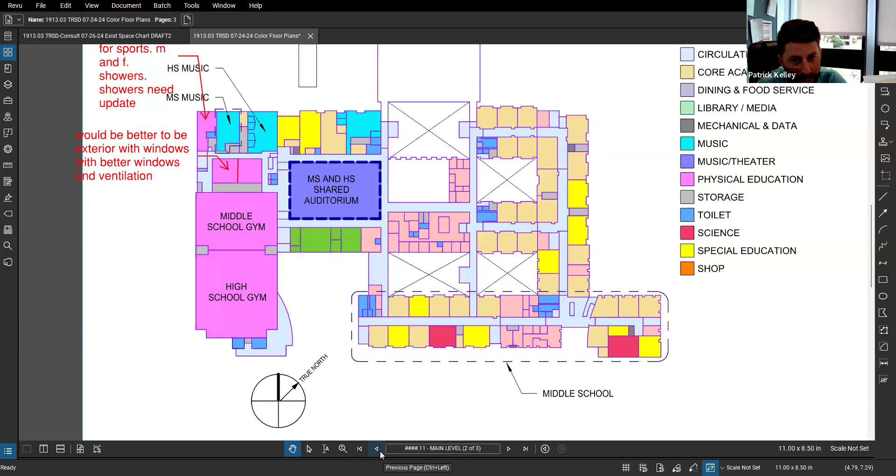Yeah, I think that's tons of unused space that could be repurposed. One of the other things we say is unused space, but one of the things we're already desperate for is storage space. And we do need places for storage as well. And if we chop off all of our extra space, we lose out on any potential for storage.

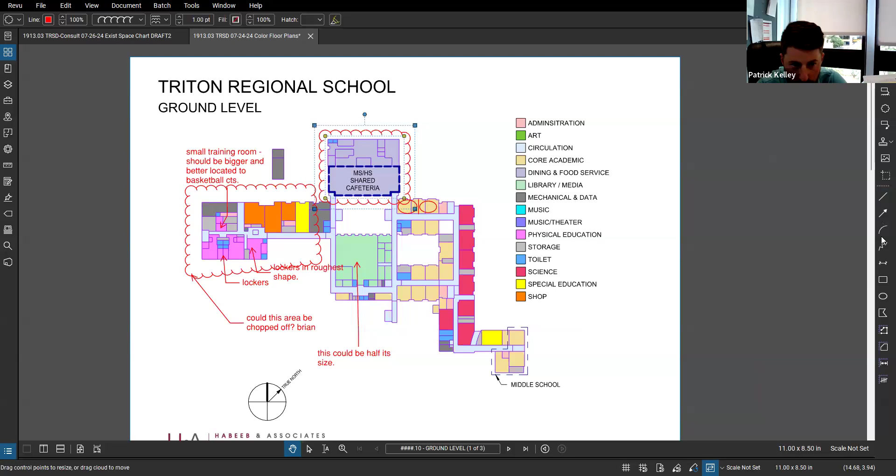But even if we were to - Julie, if you can go back to the library, is that the library? There you go. If you take off the cafeteria, you then have that middle courtyard that's white there just below the cafeteria. And all of that library space, if you're capturing that and rebuilding - I'm not saying knock it down and don't use any of it - I'm saying can we capture existing library space, and even using, you have to think about outdoor windows and stuff, but all of that space in between, just north of the library, if that could be utilized and filled in, that could be 2 stories of additional usable space in the existing footprint where we're not going outside the footprint.

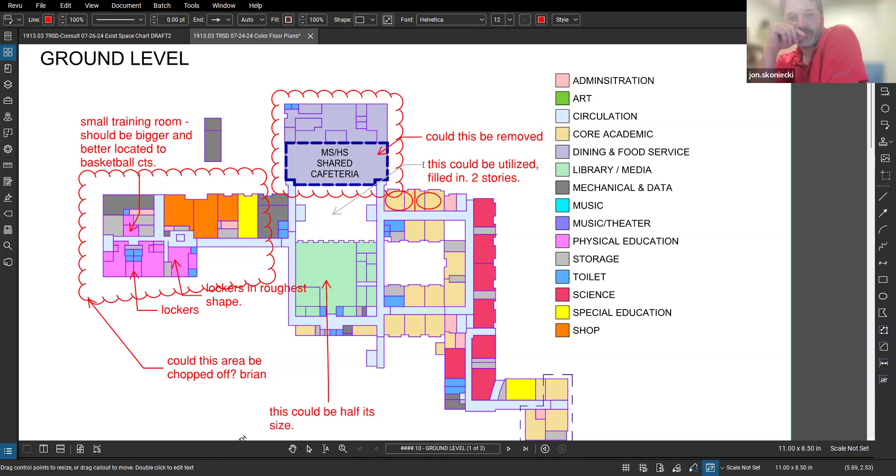Yeah. You're saying use that courtyard? I'm saying use the courtyard, somehow fill it in, like we were talking about putting the cafeteria and food dining services over in the entrance courtyard, rethinking that. Could the library again make it 2 floors? You only probably need half to three-quarters of one floor of the library to make it still a really big library. And then if you did that on the second level, you'd have the whole first level of the library as well, and you could use that for shop space and all kinds of other things.

The only thing you lose there is natural light and access to the exterior, right? That's what I'm thinking - it's good to be able to wheel stuff in and out of a shop. And it's good, especially with where our metalsmithing studio is, to have access to the exterior for ventilation. I mean, we need ventilation for all of them, but from a fire standpoint...

It could be, like if we were to utilize that current courtyard that's white between - above the library, below the cafeteria - if that was on the first level, stuff that needed outside access could still accomplish that. Yep. But I agree, you don't want to box it all in so there's no window access.

I think if we could figure out how to get the library on the second floor and close to the auditorium, because it's right next to the auditorium - if it was basically that space there, that would be an incredible way to do it.

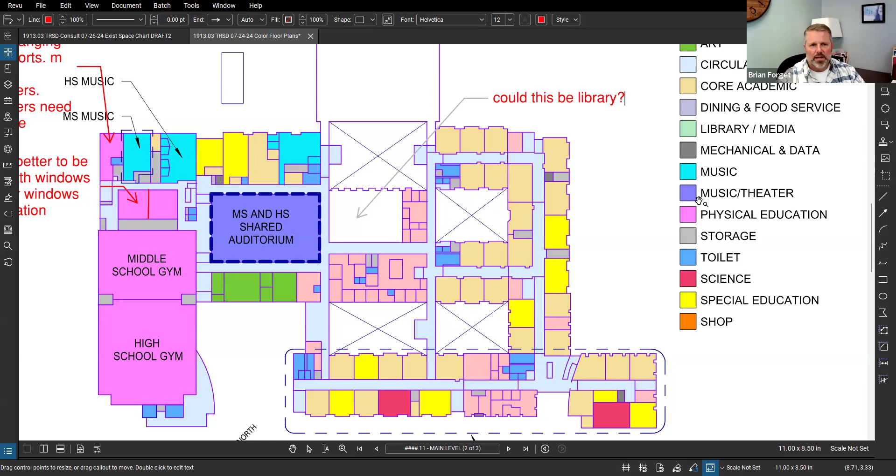He left a minute ago and was trying to come back in. But I think you're saying, could this be the library? Yeah, so that's currently the library, the roof of the library. Open air space, that's the library footprint. If that were captured as the library, you now have both of your gyms, your auditorium and your library connected with your food services. And now I think that takes it up to 97% of all community use.

Can you hear me now? Yeah, got you. I don't know what happened, I lost my camera and mic, but okay. We got you now, see and hear you again. All right.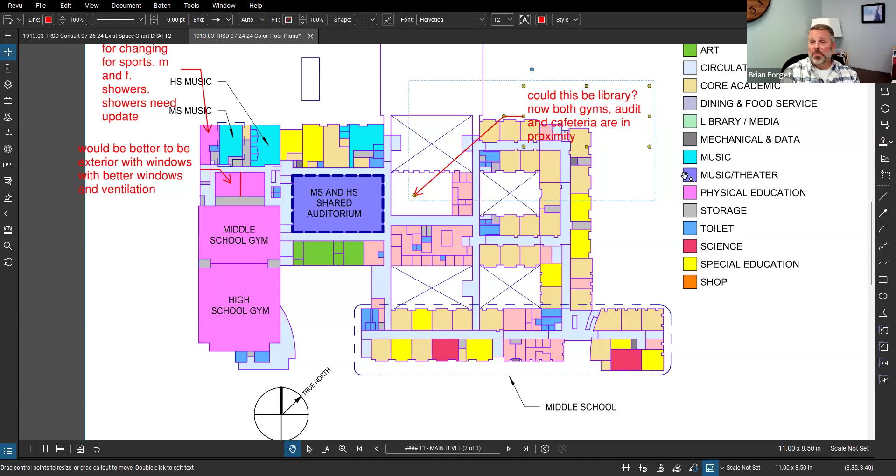And maybe other people disagree with that, but I feel like if we could get the library in better proximity, I think it's smart.

Would it be an option to put the library on the bottom floor instead and the cafeteria on the top floor? Or not put the cafeteria in the courtyard, but put it there? Is that what you mean? Yeah, I'm thinking if you essentially split that library into a first floor, second floor. If you're gonna say putting everything together, I would have putting the cafeteria closer to the auditorium and gym access as a higher priority than having the library there.

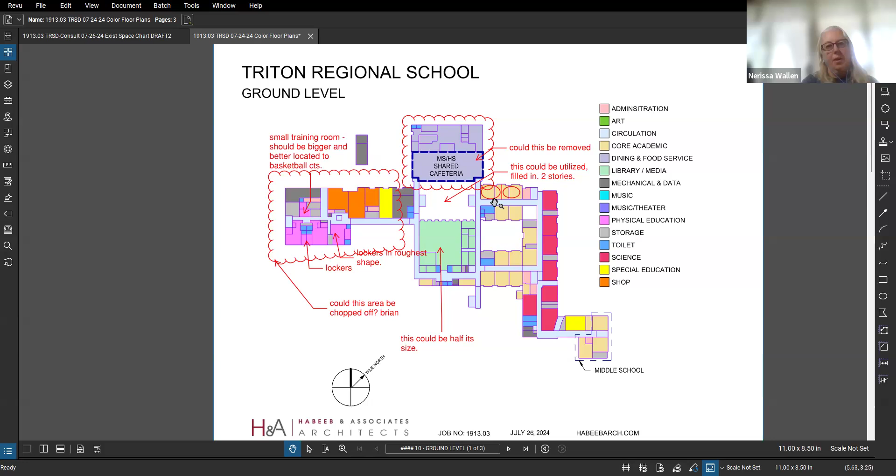The challenge with putting a cafeteria on an upper floor is the deliveries. You're getting deliveries every day to the kitchen, and you'd be relying on a freight elevator probably to get the deliveries up to the cafeteria.

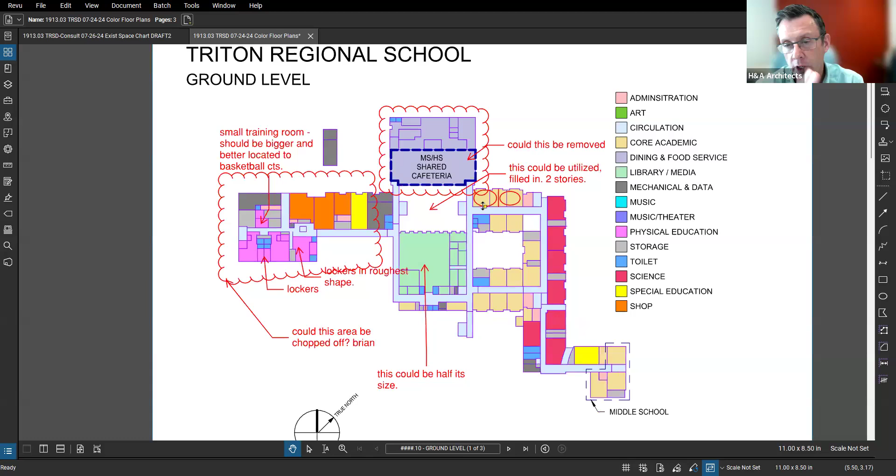Well, you'd be main level, but on the front end of the school instead of the back. Yeah, I was thinking the cafeteria would be the existing courtyard. That would become what is existing currently at the front of the building to the right of the gymnasiums, capturing the existing concrete courtyard.

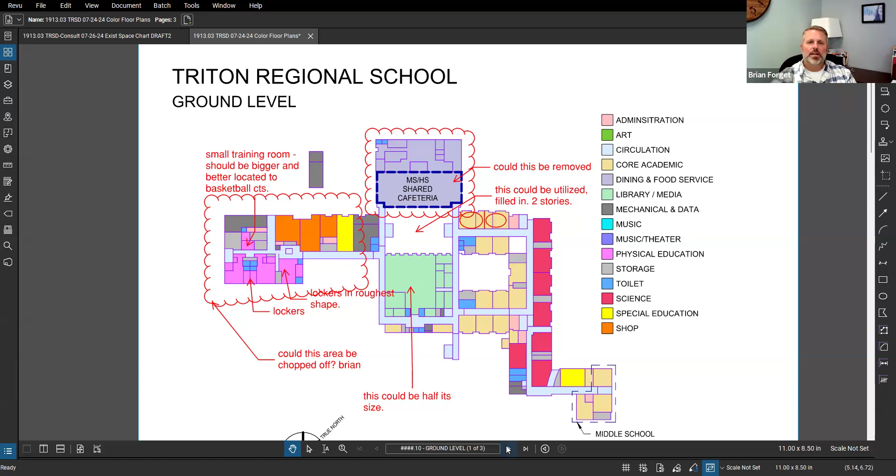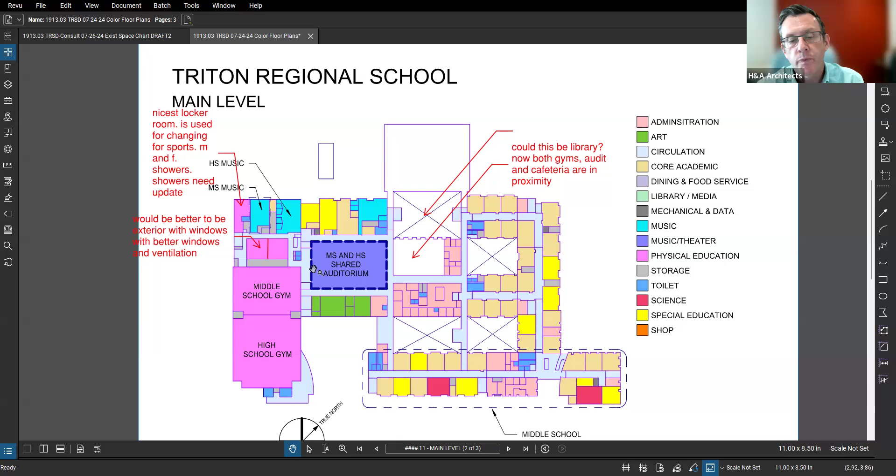So, like I'm pointing with my cursor, is this the cafeteria? No, Julia, on the bottom, just to the right of the high school gym there's an outdoor courtyard. Go back, same slide, main level, right there, to the bottom right, right of the high school gym. Oh, right here. It doesn't exist, it's an open courtyard right now, that's the entry courtyard.

But what I would say is capturing that existing outdoor space to be the cafeteria. Again, you have to figure out where the kitchen goes, where all the accessibility. And I think if then you have the cafeteria there, the auditorium there, and the library could come up to that floor as some part of the existing library footprint, you've got all of them on the same floor.

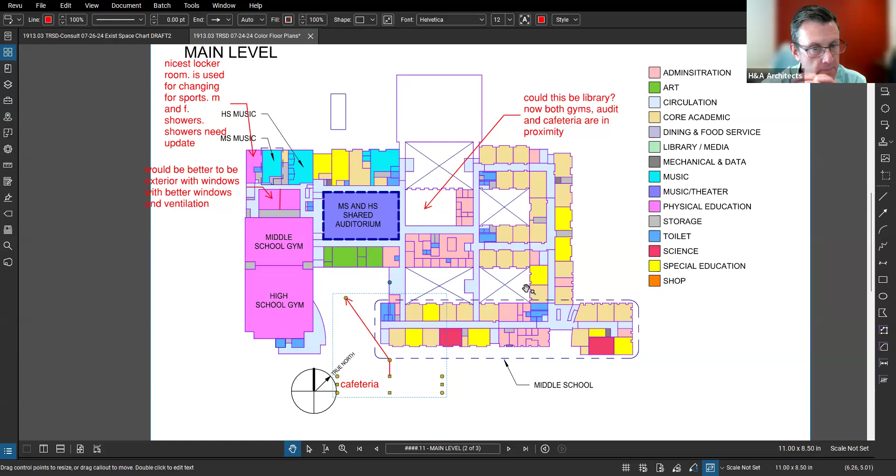So again, the thought would be in that space as well, you've got your access into the building, because you've got the access to the middle school to the right there and then into the high school. So bring those office suites, the high school office suite is there, but bring the middle school office suite to that end of the building as well, and you end up with kind of an access.

And then the question would be, is there a way to get... as an adjacency diagram, it makes sense. I think what I'm struggling with in that concept is how do we load the kitchen, without... you want to load the kitchen directly from the exterior and not have to bring material down a corridor or through the school.

Don't you have a water feature in your office? I thought it was. I do, yes. It's a private bathroom, isn't it, Brian? The bathroom isn't the water feature, the windows are the water feature.

Matt, I've got the water feature too. Oh, nice.

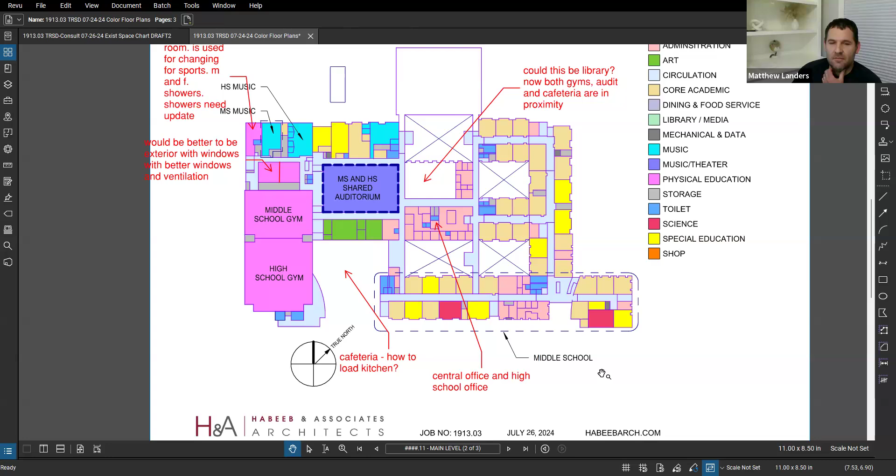Yeah, I like the cafeteria in the front, but I think loading is going to be a big issue. I agree, and I don't know how to do it to make it work. It might be—again, we're getting into bigger costs when we're moving—but could the cafeteria...

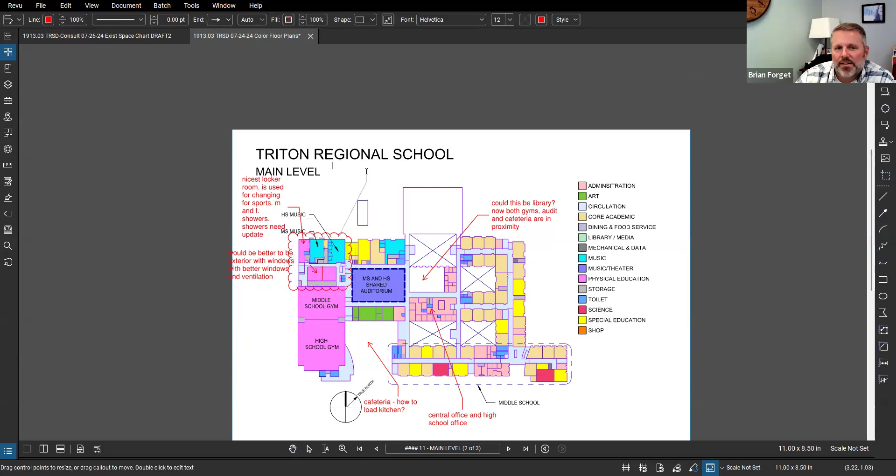...go behind the middle school gym, where all those three levels of locker rooms and spaces that we're saying are beyond repair are? Can the model open all this up? Could that be the cafeteria? Could be, yeah, could be—bring it into the existing footprint, that square. And if you could figure out a way to get rid of the stuff to the right of that, you've got outside access to the auditorium and outside access to the cafeteria.

I don't know. You don't like it? No, I don't like the location. Yeah, I don't think the location works. Sounds expensive to me. It's a little remote, yeah.

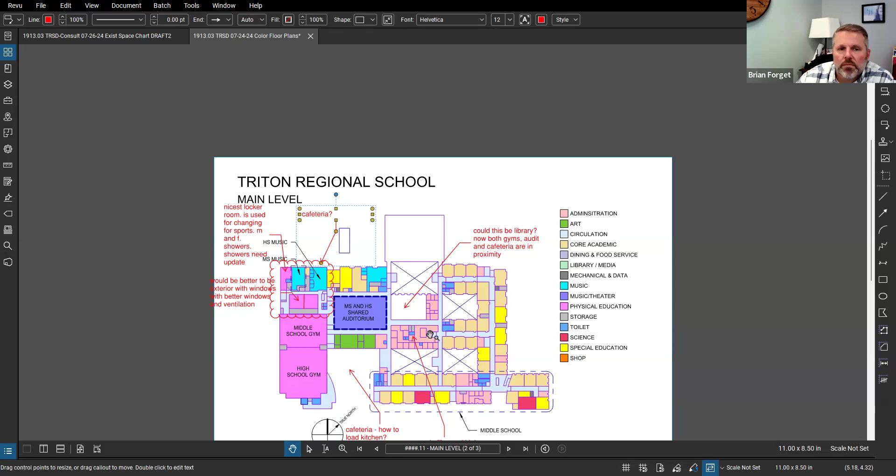I think it becomes really screwy with the exterior ground level, and I think it takes away an area that, quite frankly, we need some of what's in that area—like whether it's locker rooms or maintenance space, we need...

...to figure out where a lot of that space goes, and that's okay, we're not making decisions today. But we can't get rid of our maintenance shop in the process—John's guys would be in a little bit of trouble. You could move to central office too.

This is exactly the type of conversation I was hoping we'd have. I mean, we're not going to solve any of this here in the meeting, but we're hearing a lot of ideas about how we could potentially reconfigure the building. And that's what Julia and I do—we listen, we take these ideas, and we try to make it work by looking at it in a little more detail. So I like all these ideas, I think they're all worth looking at.

Two quick things I wanted to throw into the cafeteria conversation: I also think you'd have to reroute the entire parking lot if you want to make that work for a drop-off location, because otherwise you're going to have buses and drop-off trucks that won't match. Yeah, I don't know how that would work, just given the current parking lot flow.

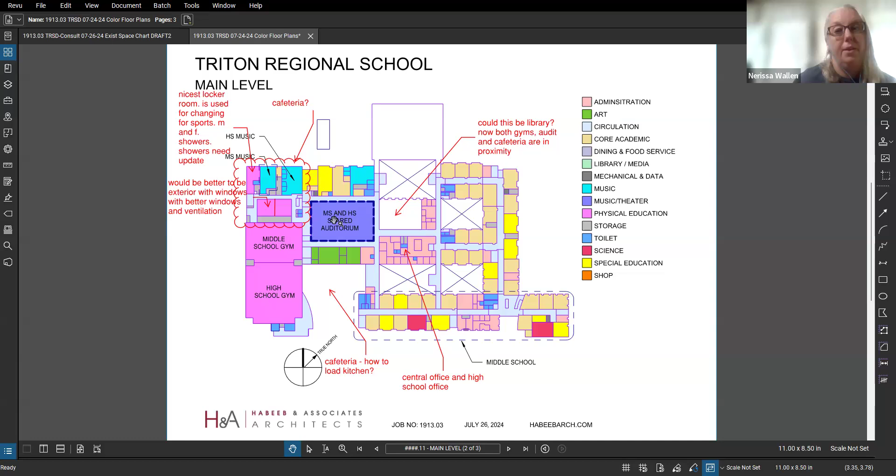And then, I guess this is a side tangent, but I think it's an easy thing to start planning for—it's a question I have. I assume you want to get rid of the outbuilding, Patrick, which is totally not represented on this plan at all. Which building are you referring to? We have an outbuilding, I thought it was...

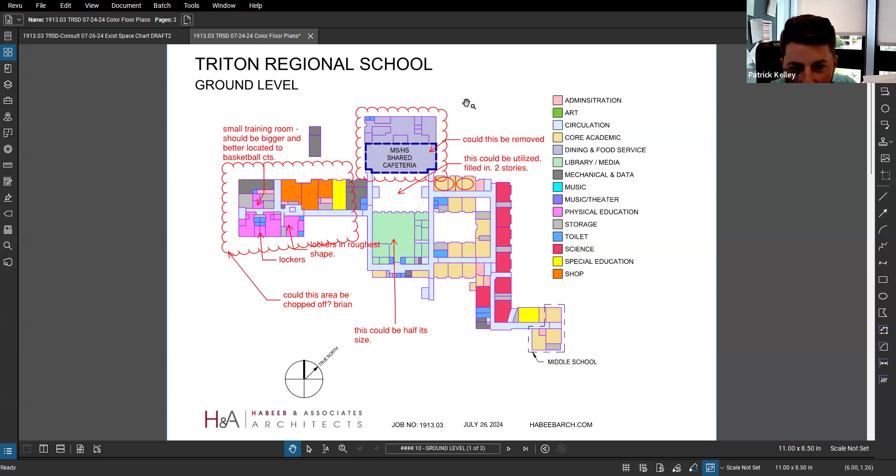Is it this utility building? That's the boiler plant. Yeah, no, there's another one—basically it would be to the right of the cafeteria, kind of where it says administration. Yep, it's up there. And so we have a history class and PE classroom, and our TV studio is out there.

And a seasonal bathroom, right? Or is that... And I would love to, I mean from a school safety standpoint, it'd be great not to have that, because right now we're dependent on the door sensors functioning properly and going off when classes are in between passing times for it to work correctly. So it'd be great to bring those back in.

Would that building as locker rooms make more sense? Yes and no—it'd make more sense, Matt, for spring and fall. And we do have the outdoor locker room that visiting teams use, especially for football, over in the stadium. But it would be great to have lockers out there for that point in time, and to keep some of that mess outside.

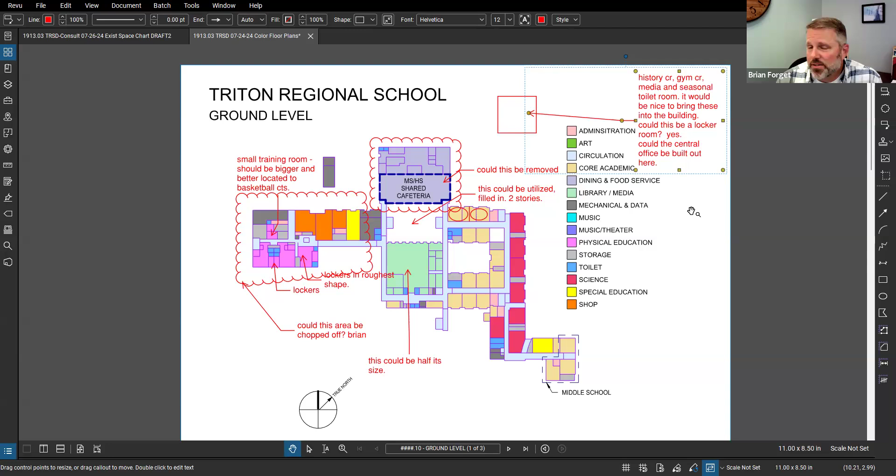Brian might also have designs on building central office out there. I mean, we've talked about it—out of all the things that need to be in this building, we are the least important to be in the envelope of this building. So I like existing in a school rather than being off on our own where we forget what we do. But yeah, if it made more sense that this office space becomes something else and that space gets repurposed... I was going to say, I can just reshare.